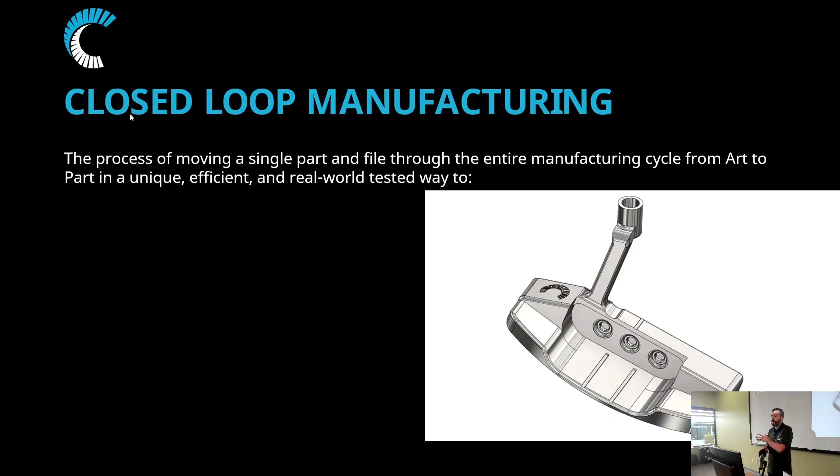If you guys were here last year, we introduced this new project, and it's actually on the table over here. We wanted to take a look at all the products we represent and take a single part file and move it through art to part, the whole design to manufacturing phase. So we picked a putter head.

We had an older putter. We reverse engineered it with VeriSurf. We scanned it in, then we actually 3D printed the head of the putter in stainless with desktop metal. And it's such a unique shape that instead of creating your own work holding on a CNC machine, we decided to print it in, I believe it was carbon PEEK. And that frees up a CNC machine. That material has just about the same tensile strength as aluminum. It's holding the part well. It's not marring it. It allowed us to do all our operations and finish that part.

They were minimal, with some engraving. We milled the face of the putter and we cleaned up the bottom. But it just shows you an idea of how 3D printing and additive can help your shops.

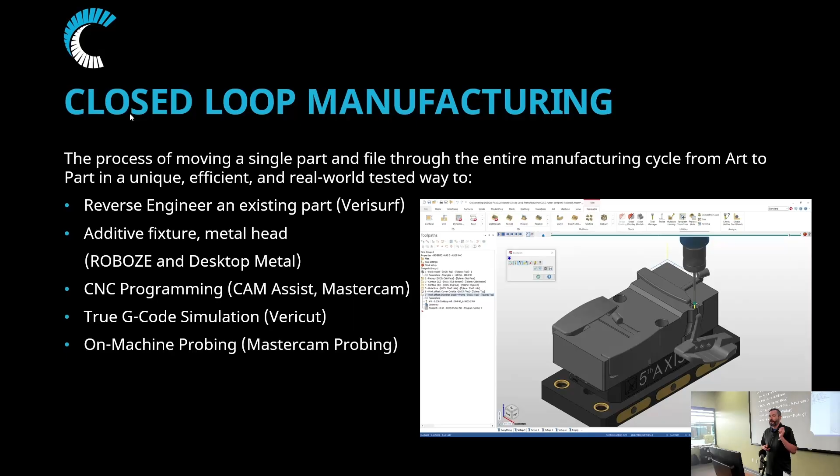So for the programming, we can rough the part out with CAM Assist, finish the programming with Mastercam. Then we want to make sure it runs correctly on the machine with simulation, that's where Vericut comes in. Before, during, and after the machining, we have probing routines to make sure that the part's located. We're inspecting it during and after. And then, of course, we're going to scan it in with VeriSurf and make sure that it's exactly what we wanted.

So the final thing, which is my favorite, is you got to take it out on the golf course, see how it does. Did not make me a better golfer. Not much does, I'm terrible. So we used it, it worked out. I loved it. I still stink at golf.

So we make all these, or we sell all these products. We service them, we offer support for them. So just keep an eye out for that.

There's also an article that we created. It's a 4-part series. It goes through the entire process of making this part. It's on machinedesign.com. So you go to that website, you click search on the top right in orange, then in yellow just type putter, and then you'll see on the bottom there's 4 different articles that you can read through. It's a good read.

Moving on to WESTEC that's coming up. They moved this from Long Beach to Anaheim this year, and they moved it a month earlier. So it's October 7, 8, 9. This is my pitch to everyone to go to the show. We have a big booth right up front, number 1201.

We actually have a really cool project that we're working on with 5th Axis, Gosiger, Kennametal, and of course Mastercam. This part's actually been cut and is sitting on a machine. I think they're doing some cutting today on it, I just heard that this morning. But it's an Okuma M560V 5-axis machine. So during the breaks, at lunch, go and check that thing out. It's a cool part, it's kind of like an aerospace amalgamation. It's got a bunch of different aerospace features on the part.

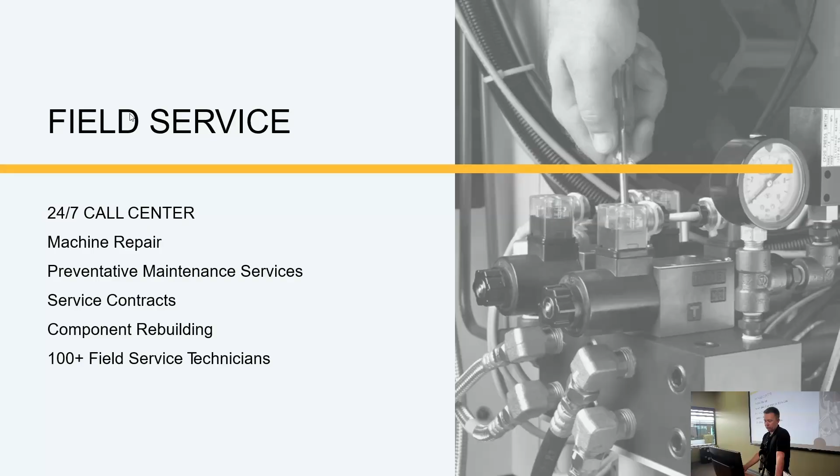We do process engineering, turnkeys, contract engineering, so if you guys need help programming or with your process development, we do that as well. Very strong service group that's available, 24/7 call center for technical support. We also offer equipment financing.

So again, 100-year-old company, we've got a large operating footprint, we've been around for a long time, we'll be here for a long time. We've got strong relationships with the brands we represent in all facets of the support of the equipment. You're welcome to follow us on social media, and thanks for being here. Thanks, guys.

You didn't tell me there was going to be an extra remote. What the hell is this? Throw you off. Yeah, perfect, great. At least I have an excuse now.

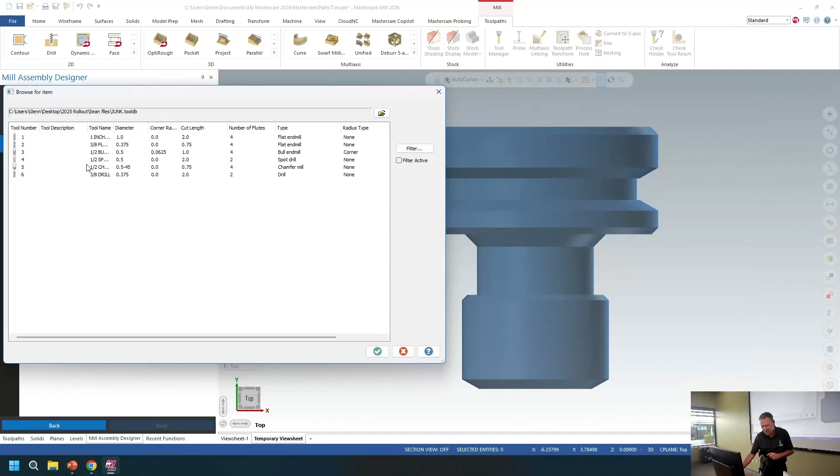Now, when you add a tool, I'll just grab one of mine. Okay, whoops, wrong size tool. Don't do that. Good news is I can delete and add a new one. Let's see. Close enough.

Okay, the good news is that within this assembly, I still have full control over tool edits, holder edits. A lot of people think that once I have this assembly built, it's done, and I have to do a new one if I want to make edits, and that is absolutely not the case. In this tool assembly tree, I can right-click and I can edit just the tool individually.

So what they've changed and made better, kind of like the machine group properties, is you can work with the different tree style buttons here: tool number, what type of tool, of course all your logistic stuff, cutting diameter, flute length, tip treatment, which again is basically what type of tool it is, and of course your speeds and feeds, all the other savable items, coolant, etc. You can use your next button to toggle through these items, hit OK, hit OK.

I have this all set and ready to go. Once you have taken those, and just to speed the process up, I'll add a couple that I have previously messed with here. Then if you'd like to save these items to a library, it's no different than it's always been. I can right-click and just save them to library and you're done.

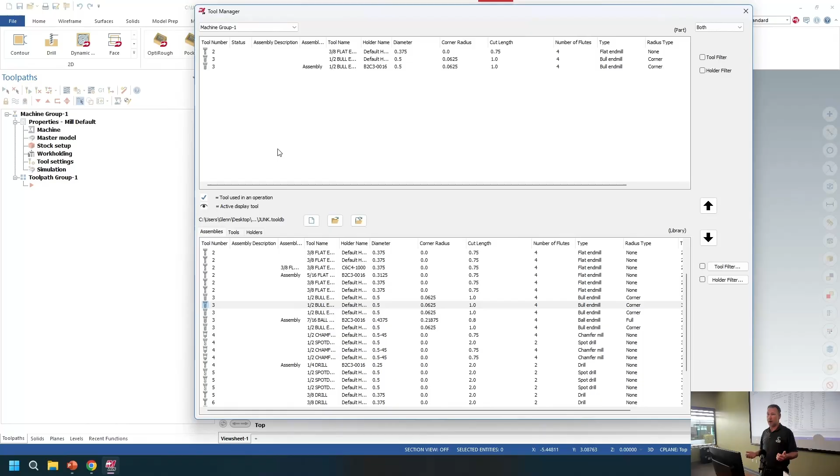Okay, so I really like this because, again, with less mouse clicks, number one, in the classroom I have to teach you less things. We get through the day faster. But I also have the root menus that I've always had. If you're used to using the tool managers, great, because this is still the same old manager it's always been, but with user-friendly items inside of it to help work things along and get your assemblies saved.

And don't forget, guys, if you have assemblies and tool libraries from older versions, they're very easily updatable. That's one of the things that I think a lot of people don't realize, that a few mouse clicks and your assemblies are moved into the new software, so you don't have to start over. If you ever have questions on how to do that, you can reach out to myself or one of the other tech support staff. We can get that done for you.

Lastly, and this is a quick one, but you may have noticed in Mastercam 2026 this little guy right here. I cannot tell you, one of those things when we at CAD-CAM first got the preview versions of Mastercam, we looked at that and went, okay, it's the same thing, just not down here anymore. Use the hell out of this, gang. This is one of those things where basically anything having to do with planes, 2D, 3D, is right here in front of you. And I got to tell you, especially as I'm getting older, now I'm using reader glasses, which I hate to admit, having something right in my face is a nice thing to have.

Okay, so you can access your planes right through here. You can change your graphics view, your coordinate system, construction tool planes. You can even switch between 2D and 3D. And the other thing that's cool is you can even create a plane from right here too. You don't even have to dive into the manager to do any of that. So that's one of those things, again, just a small, minute change, but it's less mouse clicks and it's right in your face.

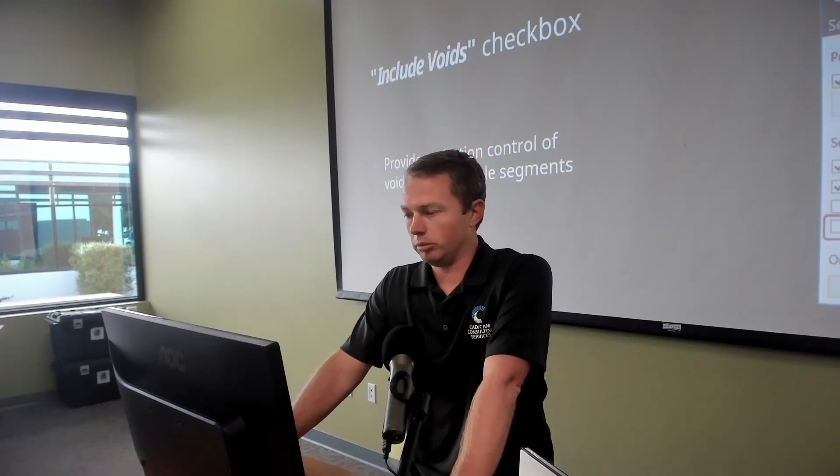So I'm going to show that here, and then I'll also in the same file show this priority safety motion, which is cool. Let me go over to Mastercam here and see if I can find my files.

Let's see here. I need Sean's reading glasses. I guess we're all getting old, huh? This one.

In Mastercam 2025 and previous versions, whenever you had a hole like this on the same plane, you would get one toolpath and you wouldn't have the ability to chamfer both sides. So I'll show that here a little bit, and let me move the prompt out of the way.

So this is your geometry selection, or solid hole selection, in Mastercam—everybody should be familiar with that. In the advanced tab now, under the 5-axis drilling, you have this include void option, which is checked. This is basically how Mastercam used to be.

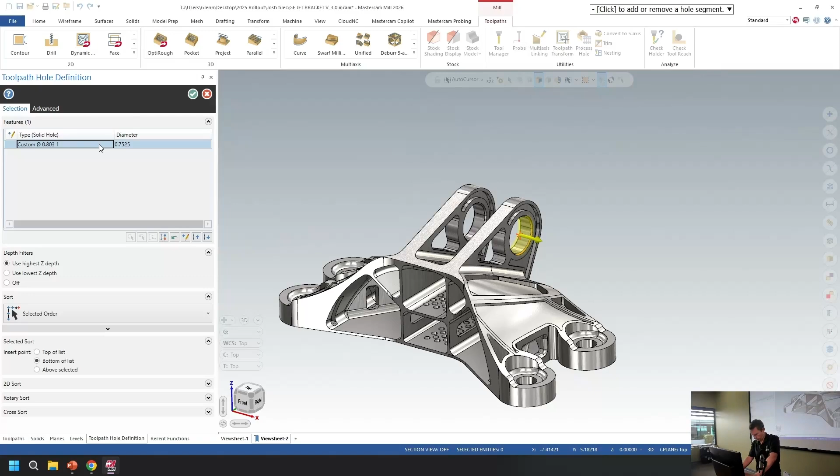So I'm going to show you—let me delete this and go in and select here. You can see it's automatically grabbing this other hole and reading it. So if I click over here, I cannot get a separate arrow on the solid hole. I'm limited; I would have to create another toolpath to spot drill or chamfer that, etc.

Now in Mastercam 2026, this is off by default, the include voids. So when I come over to selection, now when I click on the solid hole, I can also select the other one over here, make sure my arrows are going in the correct direction, green check, and I'm going to jump into the parameters here.

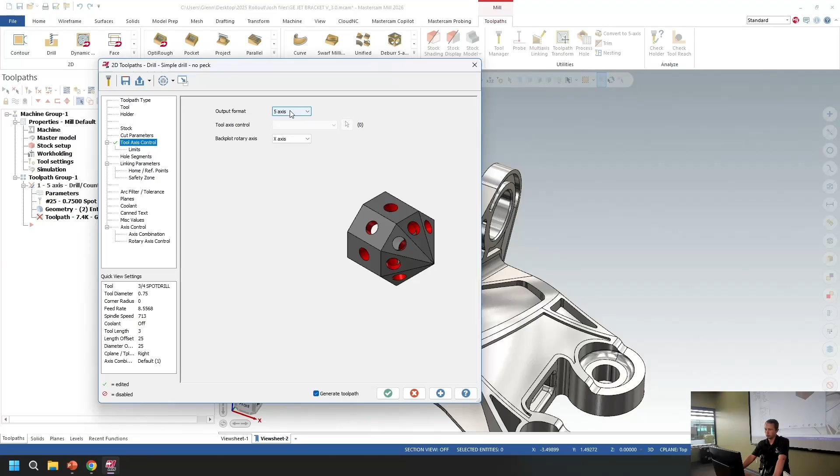You need to be on 5-axis output for your tool axis control, and set the other parameters—safety zone, all that good stuff. We'll take a look here for time's sake. I'm going to green check, and you can see now we can do it in one toolpath, whereas before this would have had to be two separate toolpaths. Just a nice little enhancement there in Mastercam.

Hopefully it makes your life easier—that's the goal. One little step at a time over a lot of toolpaths, a lot of years, but big improvements. So that's one really cool thing, and again, that's off by default. It's in the geometry selection under the advanced tab.

If you're used to the way 25 worked and you need that hole to go all the way through, you can go back to that. But now you have this option, which I think is really cool and helpful for operations like this. I'm also going to show in the same file here, under safety zone...

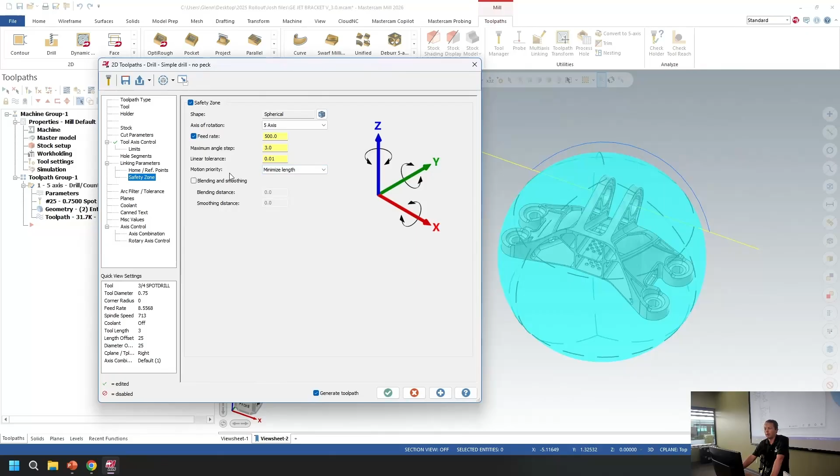So we're still in 5-axis mode for output. Under our safety zone here, they added a priority motion option for your retract length—you have 3 new options now. You have minimized length, which is the shortest distance, and minimized angle, which tries to get the least amount of motion on the rotary axes, so you can minimize that.

So I'm going to show this here—if I do minimize length, you'll see that I'm going to get motion like this. So I'm going to green check here, and I have basically the shortest distance, if you would.

If I go in and select minimize angle, it gives me the shortest, least amount of rotary motion needed. It's trying to limit that and be more direct. You also have balanced, which tries to do a combination of both. So you can select one or the other, and balanced tries to balance both as best it can.

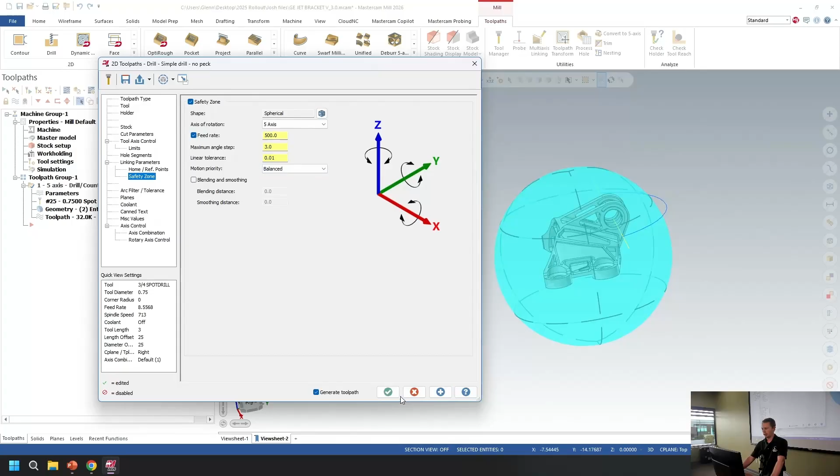In this case, we could try it, but I think it's not going to do much besides favor one of them. Yeah, so it's just picking the minimum angle, I believe.

Minimize angle, yeah. So if you have a motion you're trying to go around on your clearance there for multi-axis, like drilling or other operations, it can be helpful if you don't want your rotaries spinning around a lot. You have the option to minimize angle or minimize distance. Think of it like an aircraft flying around—if you fly to Asia, you fly over Alaska for the shortest distance. It's that same concept.

So I know this part shows it nicely with the sphere. It's not overly complex, so you can see, like I mentioned, think of it like a plane flight—flying across the globe, shortest distance, minimize angle, minimize length. So those are some neat new enhancements.

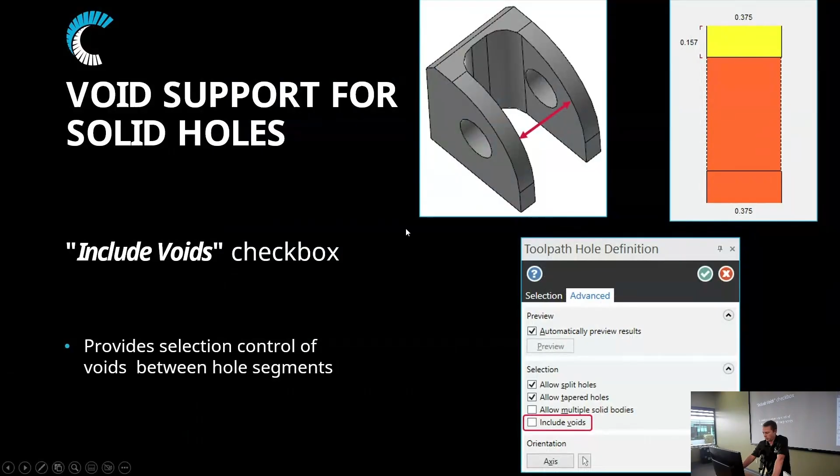I'm going to jump back into the PowerPoint here, and they also included a new thing: critical depths in OptiRough. So let me jump into Mastercam to show this.

Let me pull up a file here. See how fast this computer is, huh? Yeah, we're going to metric units. Cool.

So in OptiRough here, under our cut parameters, we have a new critical depths option in Mastercam 2026. Keep in mind, this is for step downs. We still have the ability to do step ups—nothing has changed, we've just added functionality, which is cool.

So in a case like this, you have a feature with flats here, and you could use step ups—that'd be one way of doing it. But if you're stepping down like this, maybe you want it to grab some of these floors and get some critical depths. So you can do it two ways now.

The critical depths option lets you include flats, so it'll automatically detect them and pick them up, which is really cool. Or you can select them manually—if you really want to force a depth cut to a level, now you can force it to that depth and it'll go around and machine everything at that depth. Maybe you only need it for certain applications, but it's more power, more functionality, and makes you a better programmer when you need it.

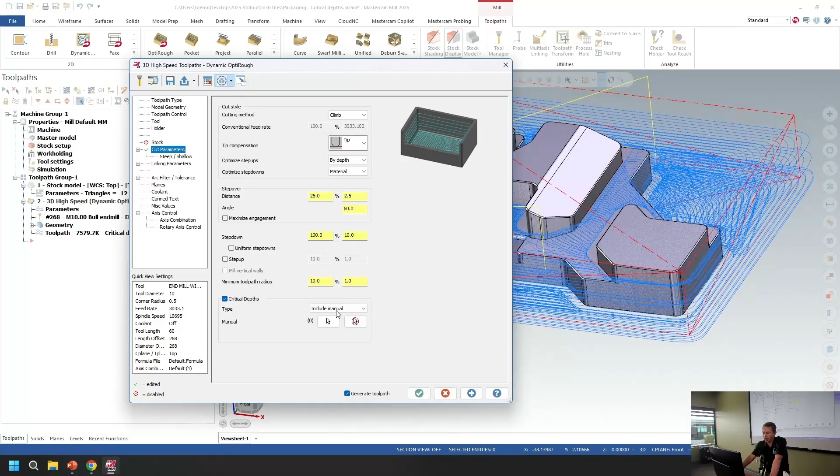So if I hit include flats right here, I'm going to show you what it does. You could see when I tipped it to the front view, it wasn't getting the bottom floors. We'll regenerate this here.

This could be helpful too if you're cutting, say, 100% or 150% of your tool diameter, and you're really close to that floor—maybe you want to grab that critical depth, or maybe it's a bit above. It's really helpful to grab it with critical depths. You can see now I'm getting the flats. It did add a tool path, but I am getting those critical depths that I want—just a nice enhancement that'll hopefully make your life easier.

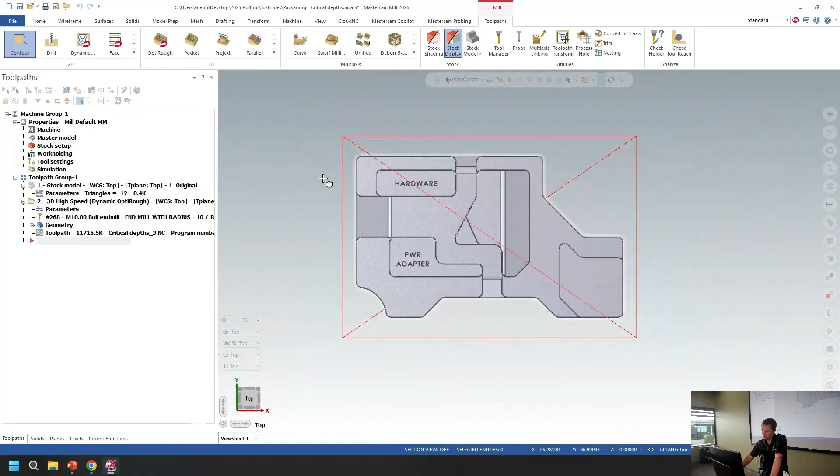And the last thing I'm going to show here is in Contour. Let me go to—I'm in the wrong plane, hang on one second. Let me flip this to top here. Isometric. So I go back to contour here.

I'm going to grab just a feature here to show this. You're probably familiar with it from other toolpaths - you have the dynamic motion with the color selection for chaining geometry, right? So they just added this in the contour toolpath, and I believe a few others as well. It was in the dynamic toolpaths, like Peel Mill and those. So they just added it in contour. It's a nice little addition - it's helpful because now you can see, okay, I chain my geometry, it's green.

You can change these colors if you don't like the color and it's hard for you to see. But it's just easier to see now - green chain, avoidance model, etc. In contour, it's pretty straightforward because we're not usually doing a lot of avoidance stuff and different things. But in dynamic, I'm sure you've all used it and it's been pretty helpful. So just a nice little additional enhancement there.

All right, and I believe - oops, got the wrong thing. Did I go back to PowerPoint? There we go. Thank you. Any questions? All right, either I did a good job or I didn't, so thank you.

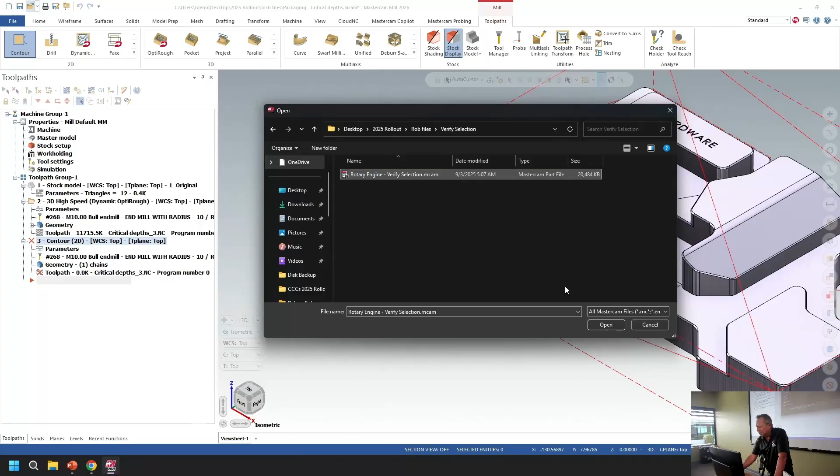This one is just a nice, clean enhancement that helps you guys with some really busy models. As you know, trying to select something that is deep down and buried inside of a model, you start hoping you can click on it. You're clicking your mouse all over, and you don't even know what level things are on. So let me show you this nice clean one.

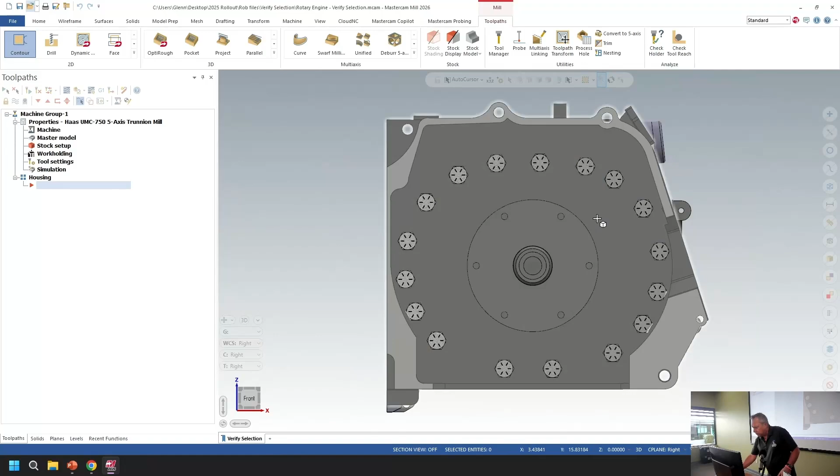Notice when I hover my mouse over the part, now what happens is it'll give me a number - it's like there's one of 7 features. So what I can do now is not move my mouse, let that hit, and when I right click, I can see, if I'm going to grab this surface here, hide it, and grab that surface. So just another thing that's going to make your life a little easier. And depending on the view you're in, it'll find that number. Again, it's just a right click and bring up what level it's on, and you can easily select that and move on your way.

So let's go back. Let's go back into the PowerPoint.

Yeah, so the tapered helix. You might look at something like this and say, well that's cool, but it's kind of just a switch, right? Why do we have this switch? Well, let's go back to when we started with dynamic milling. It was all thought about based on the tool, giving you guys control of the cutting tool with the step overs and the whole motion. And I'm assuming all of you are now using dynamic - let's hope. So with that in mind, we decided we need to control the tool actually getting into the material now, and how are those chips going to come out. Something as simple as just throwing a switch with tapered helix is going to be a huge advancement for you guys.

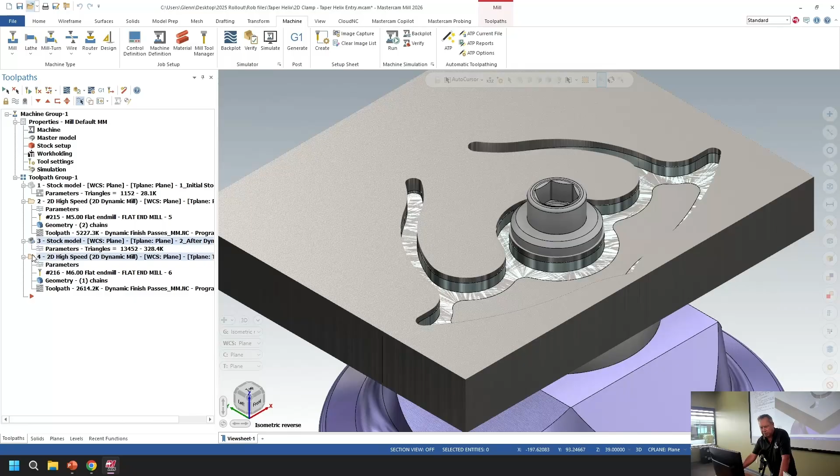Let me see, tapered helix. Let's just kind of grab a part, switching back. Okay, so let's take a look at this entry, and we'll run it in Verify. So this is the standard, typical - let's do some clipping. Oops.

No, hold on. I got my clipping off. There we go. So let's just kind of clip this and step it through. So this is what you guys are used to using.

Obviously, the tool will come in as a helix motion. And if we bring this in here, you can see once that tool gets down to full depth, then it's going to start cutting. And as we're doing this, we're just pushing these chips around inside that hole.

There's nothing to get those chips out of the hole, unless you're on a horizontal, right? So just a nice little switch here, come into the tool path, and in the entry, just turn on tapered helix, and that's all I have to do, okay?

So what it will do is take that motion, you can kind of see it right there, and what it'll do is it takes 95% of the tool diameter for the top part of the helix down to 25% of the tool diameter down to the bottom part of the helix, okay? Now keep that in mind too, we're going to tighten up that helix going down.

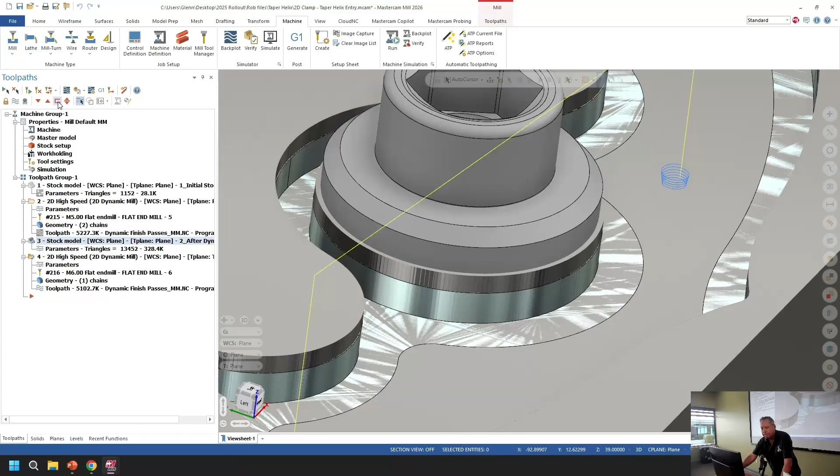So you might need to slow your feed rates just in case, right? Because it's going to start moving that machine. But let's take a look at the verification on this. And you can see just this quick little enhancement. Again, you don't have to do anything but turn it on.

Let's get it down in there. And let's pause that and grab this. All right. So you can see now as it tapers down and as the tool starts to actually start cutting that material. And here we go.

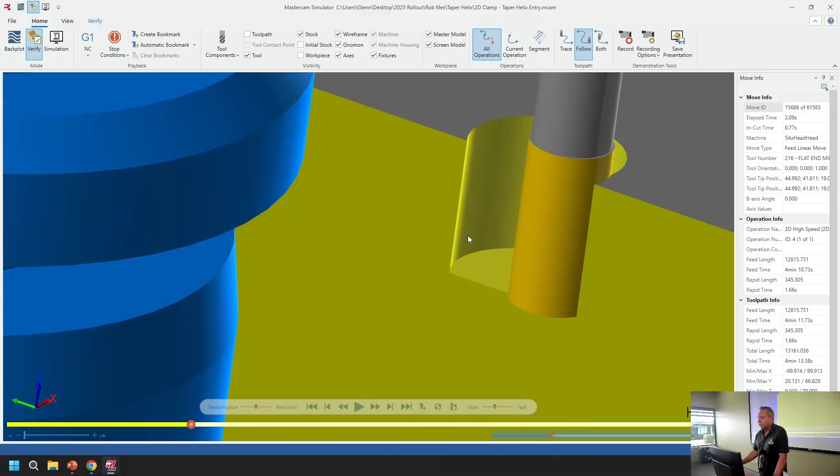Each depth cut, as it starts going, you can see it cuts here, gives a chance for the chips to get out. Make another cut, more release of the chips. And again, respecting the tool, just considering the life of the tool is really what this is doing.

And again, just something simple. This is why we have these enhancements, because you guys have been requesting them.

3D deburr. How many are you deburring your parts using Mastercam? Okay, just a handful. Take a look at the 3D deburr.

Every part has to be deburred, and it's probably one of the most unsafe processes that you have to do for the finished part. You're literally scraping material away, and you know the problems.

So we introduced in 25, we introduced 3D deburr, and we also introduced the ability to use tapered tools. But when that came out, when we were cutting with a taper tool and came to an edge, it would cut and then pull out, come back in and cut, pull out. So now we can allow for that tool to stay down.

I don't think I need that. I'm going back. There we go. So we can allow for that tool to stay down.

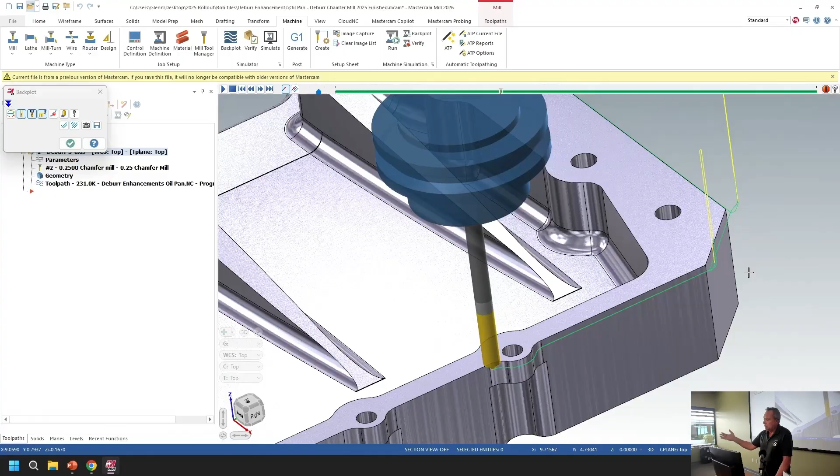You can see as this transitions from this sharp corner to this sharp corner, it's pulling up and coming back in. Now at the end of the day, all of that's going to deburr, so it's not missing anything. It's just that irritating retract move.

And in 26, all you got to do is regenerate. So in 26, when you're actually doing the tool path, it'll just be natural. But if you're bringing in a file or a legacy file, then all I have to do now, as you just saw, is just regenerate the tool path, and the tool stays down. It acknowledges those corners, okay? So it's an enhancement you don't have to do anything with, right? Just do it.

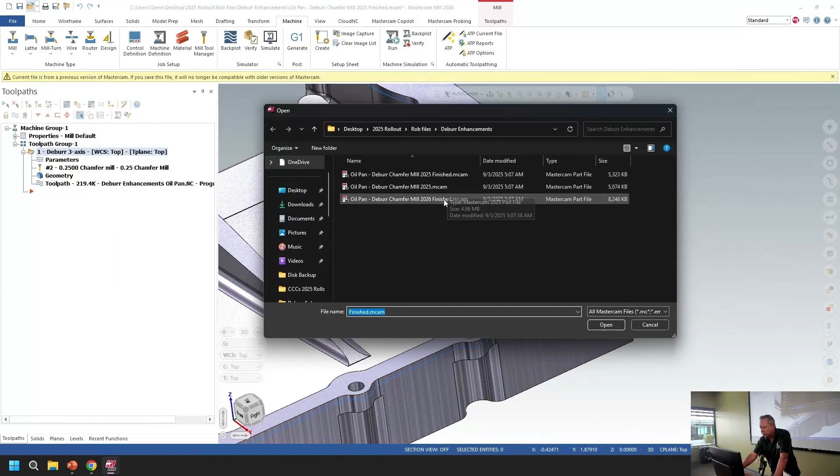One other feature that we added with deburring was with undercuts, with lollipop cutters. In some cases, it didn't cut all of the holes in the undercuts with the lollipops.

It got a little busy when things were... let's see here. When the undercuts got past like 45 degrees, it just kind of kept pulling up inside this hole, and it just didn't lay down, right? And again, you had to do a lot of trickery to get that to work, and there were a lot of things you could do to get around it, but we just put in this switch.

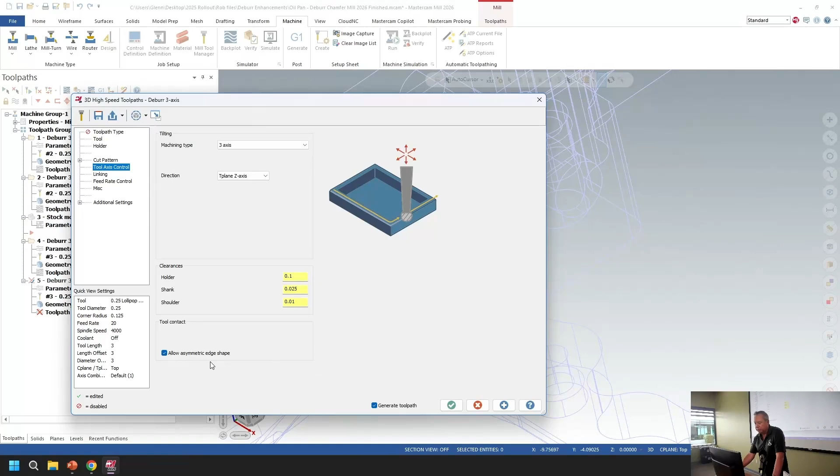To allow asymmetric edge shape. That's all it is, just a switch. Now it's off by default, okay? And the reason for that is you have legacy files. We want to read those legacy files in, and then you can come back in and throw the switch, regen, you're done. Save it as a 26 file. But just keep in mind, it's off by default.

All I do is turn it on, and then it respects... we'll have to regenerate here, okay. So it will again respect that whole undercut and cut those edges. Oh, I still have my clipping on, hold on. So we get this guy in here. Let's go in here, can kind of see through it. So you can see that this is kind of where the issue was, in that cross section right in there. And just by throwing that switch, it takes care of it. Again, keeps the tool down and gives you a nice cleaner path.

How are you driving that? Is it surface or edge?

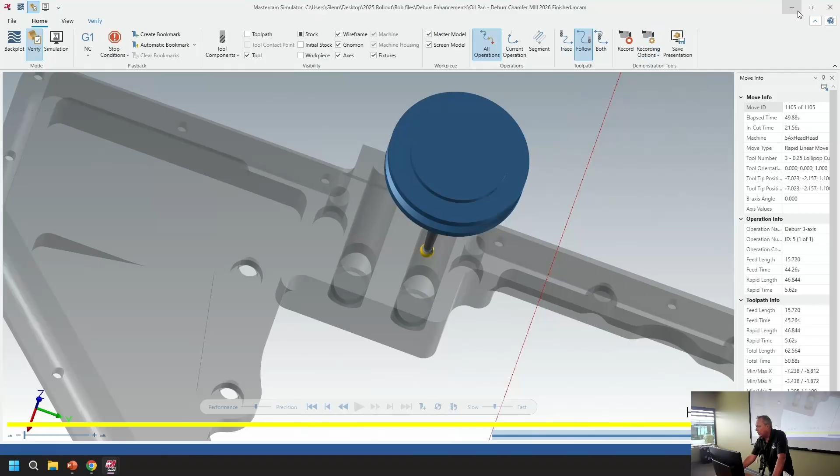You're grabbing the edges. So in the 3D deburr, just grab the whole part. Your machine geometry is the whole part, because you want a gouge check against that. Then you have the option, if I grab the whole part, I could do the auto detect and it would look for every sharp edge. May not want to do that, not in this case. So with the user defined, I can come in here and just pick, and it's just picking those edges, as you can see right there. Right? And that's all I do. Just pick the edges that I want to work with and throw on the asymmetric.

And again, you may want to turn it off in some scenarios too, right? So again, off by default. Very simple toolpath to use, very safe toolpath. Complete gouge checking. And I strongly encourage it, because again, you've got to deburr your parts.

All right, so last on the list here. Like I said, we added to the mill turn product the wireframe toolpaths. Does anybody even know what the wireframe toolpaths are? Jay, I already know you know. Okay, and Derek back there. It's funny, this was before we could cut any kind of surface in Mastercam. So I'm just talking about 2026, I'm taking you to 1990 now. Okay, we're going back in time, because that's how we used to cut 3D shapes.

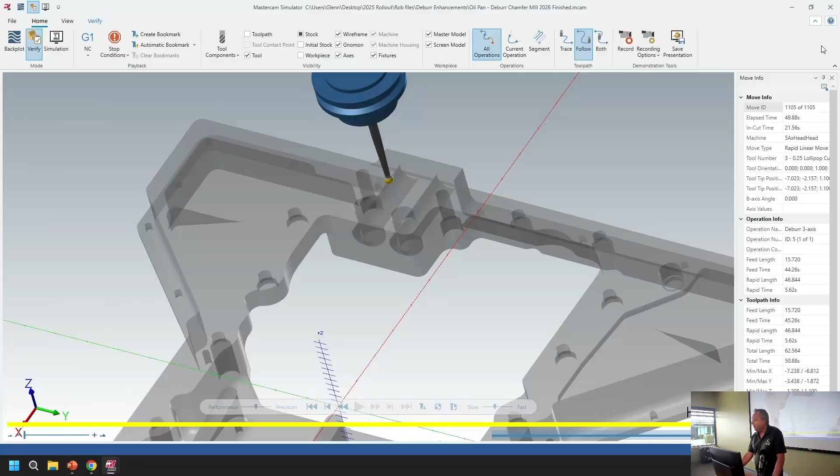And again, this is going to be in the mill turn product. So we'll open up mill turn. Then I know I have a few mill turn customers in here. So if you'd like to go back 35 years, almost 40 years in time, here we go.

So milling toolpath, here they are. You got your wireframe toolpaths now. Again, they picked the old guy, but they forgot that I got a bad memory, so let me see if I can remember my way through this. Swept 3D. Again, it's going to ask me how many contours I have. I have one. I'm going to take this guy, and I'm going to sweep it along that guy. And here's our tool, the old parameter page, again, kind of trying to trigger the memory here.

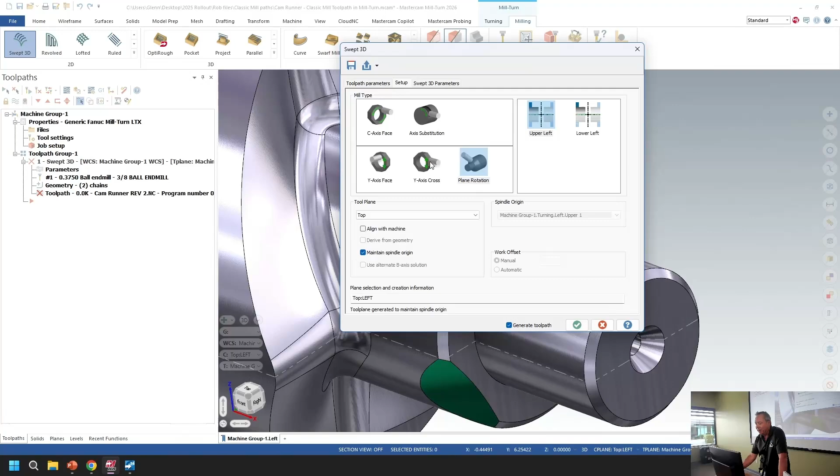The setup, any of you mill turn people, you're familiar with this. So you got to set up your setup here. But then you're probably not, obviously, familiar with this page. And this is where you literally tell it, this is my step over, this is my across. We'll make this pretty, I can zigzag one way or do circular, stock to leave. I'm thinking 2 inches. I'm not going to cutter comp this. And I think we got it, let's see if we got it.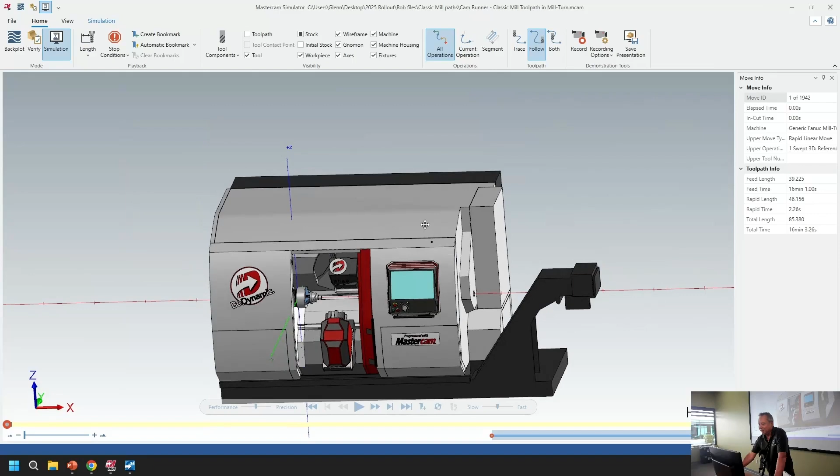So we're going to take this tool, and we're literally gonna just follow that contour across. And let's see how it works here. I'm gonna take it into the mill turn simulation, and this ended up... actually, I was laughing about it, but this ended up to be one of my favorite enhancements. It's just simple code. Okay.

Alrighty, let me get out of this. I think that's it for me.

You got one question on the stream. It's about deburring outer edge, someone was asking if you can still use chamfer operations for that, like the contour chamfer.

We didn't take anything away from you. Let me just open up that file again. The deburr toolpath is just another toolpath in your arsenal to deburr a part.

If you're looking at, and I'm assuming they're mentioning contour, let's just grab something here, that outer edge. You still have that control, so we could still go in here and switch this to 2D chamfer. The downside is that you don't have the gouge checking that you would have with the solid modeling.

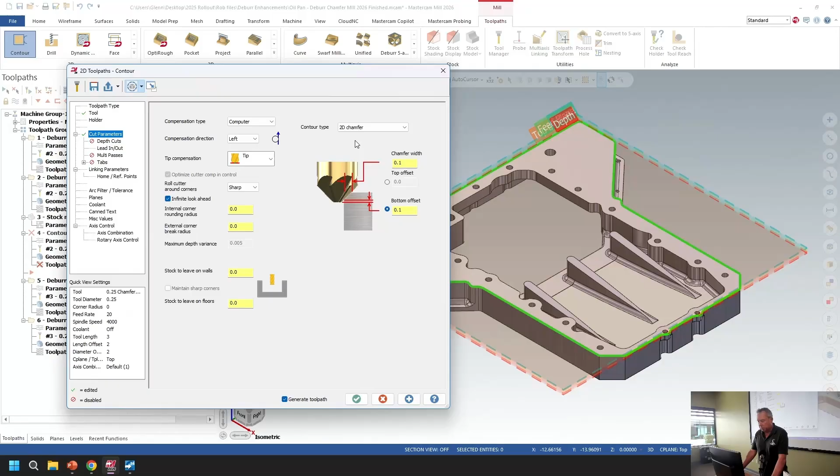and the 3D deburr toolpath. Now let's take this a little further. If you already have multi-axis, then you have the deburr toolpath in multi-axis. You don't have to purchase the 3D, you also get the 3D one. And the advantage to that is it's less code.

The multi-axis toolpath is going to be vector-based code. The 3D deburr toolpath will be less code, smoother arcs and lines and that kind of thing. Also it will work with mill level customers, you don't have to have mill 3D. And also let's not forget about our router people, they have it as well.

So that toolpath, the deburr toolpath, does live in here, and it's called deburr 3-axis. I hope that answered that question. I think we went the right direction with that. I'll wait, and I think you're good. Okay.

Yeah, any other questions online? Okay, well then, let me get out of here before I make a big fool of myself. Or bigger fool. Okay, awesome. Frank.

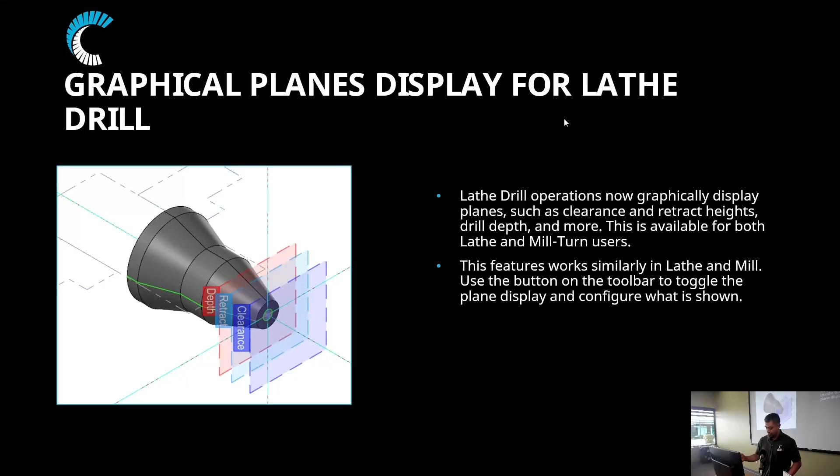There were a few things that are missing here, to the side. I don't know why they're down here, but I did want to show this.

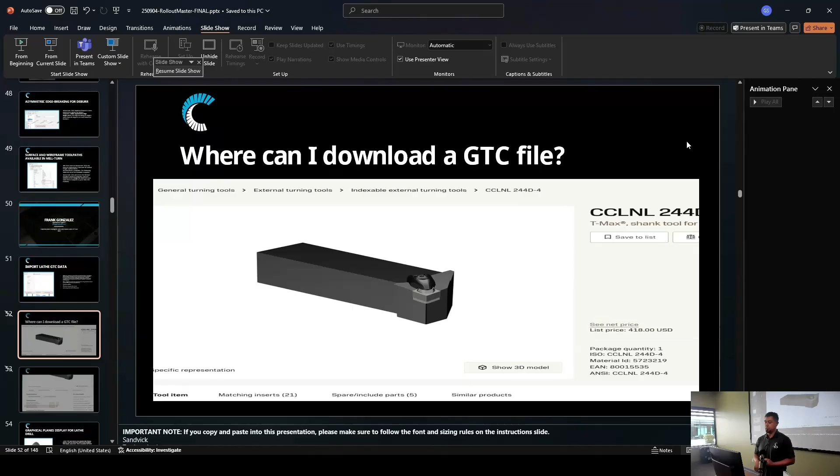So where can you download a GTC file? Like the file that I'm using, I downloaded it from Sandvik. I know there's a few other websites like Tools United, Kennametal. This is the specific tool I'll be showing.

But anyways, you can see here, when you scroll down, once you select your tool, you have the option to download a DXF or step file. Again, you'll see this option on the vendor's website for the GTC package. Okay.

Just out of this. And now to show you how that works, let me open up a file here.

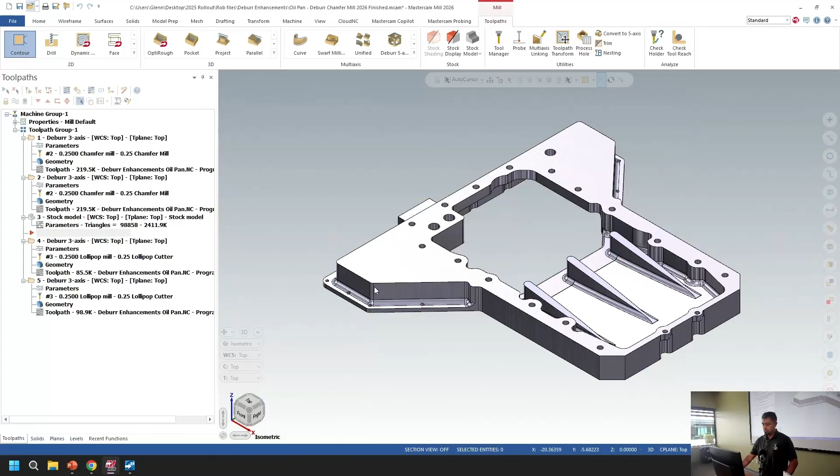Okay, so I'm in lathe. This would work when being in lathe or mill turn. So to import a tool, the way it works is you'll come into your lathe tool manager here.

You're gonna right-click in this white field up in the top, scroll down to the bottom where it says Import Export Tools, then Import Tool Data From, and now you'll see this option for the GTC, Generic Tool Catalog. So we're gonna click on this.

This will open up a window, which now I'm going to be opening and going into the files that I downloaded. So I downloaded a couple. One, let me see.

It's not opening, sorry about that.

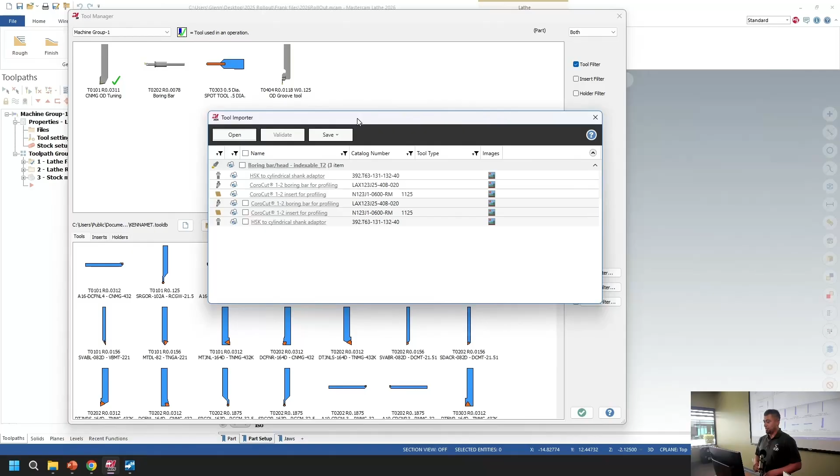So anyways, you can see here, there's a whole assembly. There's an insert, there's a holder and an adapter. You could select each one of these individually, or you could do the whole assembly. And if you hover over here on the right-hand side, you'll see it'll show you an image of the components.

So now to do the whole process, I was gonna use this tool. You go ahead and select it. The next thing would be you validate it. Validating is just Mastercam doing the work in the background of what you would normally do by selecting your holder, your insert, defining the quadrant where it's gonna be cutting, etc. And then you'll see a green check mark here, which means it's ready to go.

So once it's ready to go, you have the option here to save, and you could either save it to your existing part file, which is where we're at, or you could save it to a library. So I'm gonna select part file, and you'll see it updates up in the back.

I was playing around with this, and you'll notice that the image it's showing is because I have something in the background. If I was starting with a new file and there's nothing back there, all you would see is the actual tool itself. But now if I come in here and double click, you'll see the tool's properly defined, and you might have to go in there and change certain things, but all the tool data that came from the website is all integrated in here.

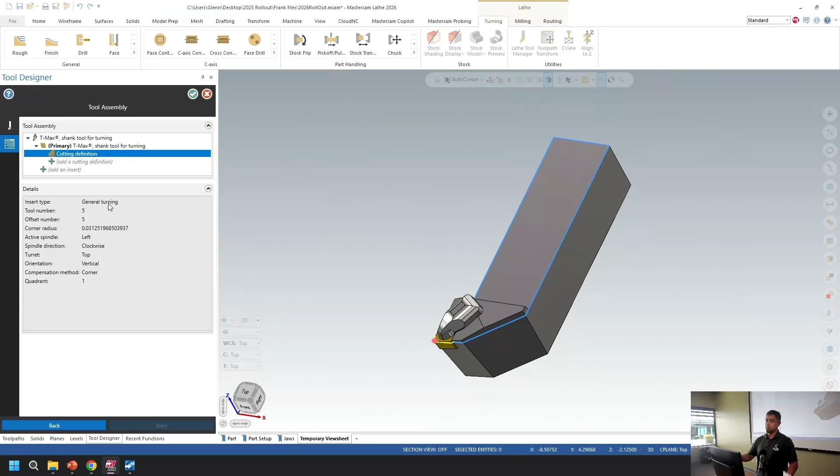So again, something takes the fun out of design, like picking your holder, inserting everything - it just does it in a few clicks. Any questions on that? So you have to have it zipped - yeah, it'll come zipped. So exactly how you extract it from the tool vendor's website, that's how you take it in.

Awesome, okay. So now the next thing will be the graphical planes, right? In lathe.

Let me activate this. So now in turning, when you're doing a drill operation, we'll select our tool, and once you're in the parameters, you'll see this plane display option. You could turn this on and off - if you don't like it for whatever reason, you don't have to be using it. You could turn it on, turn it off, and select what you want to see. So if I want to see my depth graphical plane here, I could just simply grab it and drag it to my final depth. I could activate my clearance, my retract, and just move those along wherever need be.

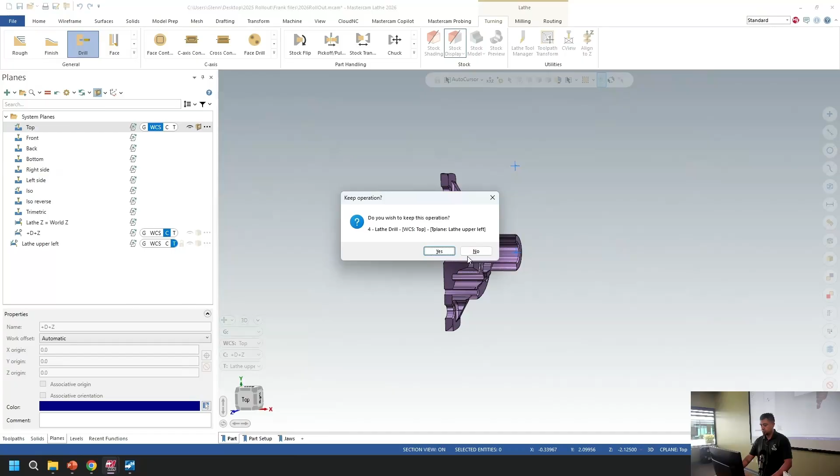And go back in here, you'll see that this also works by turning it back on. You could turn on and off the labels here, so if you type in a value, it's also associated to it. So again, something simple, but it makes a difference - at least for you to go in there and be able to say, I just want to go to this depth and not there. So anyways, in a nutshell, that's pretty much it - those are a couple of enhancements. I don't know if you guys have any questions.

Good, awesome. All right, thanks Frank. We're actually - thanks all for coming out.

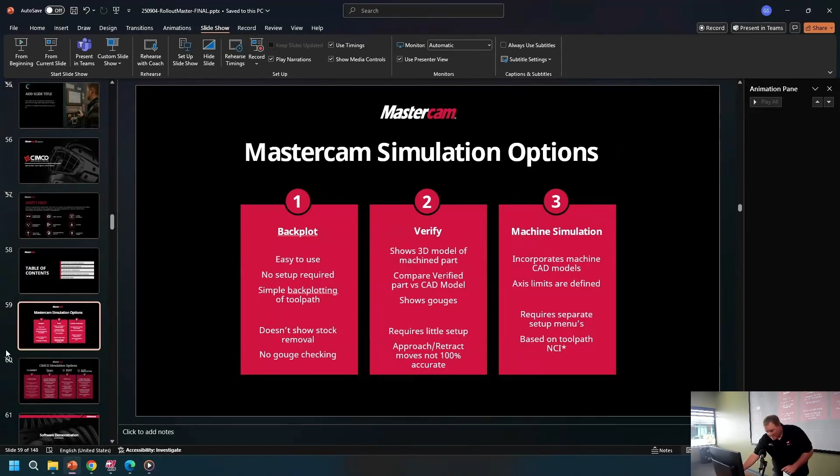Some of the - I'm missing a couple slides, but that's okay. Oh interesting, oh it's hidden. Let me unhide that slide.

So again, that's on the Mastercam side. On the CIMCO side, we also have something similar, called CIMCO Verify. CIMCO Verify is directly loaded up in Mastercam - I would say it's comparable or equivalent to the Mastercam Verify. The difference is that we are using the CIMCO technology, or the kernel from the simulation that we have in our CIMCO Edit, developed in-house from the ground up. The big thing there is we leverage the new technology of your graphics card, so GPU processing, and it's 10 times at least faster than going off of your CPU instead.

So to give you an idea, CIMCO Verify is equivalent to the Mastercam Verify, and they offer that with machine simulation. We can tie in the machine models and do accurate collision checking as part of that. Some other options get into true G-code simulation, like CIMCO Editor, which is more of a backplotter specifically for G-code simulation, along with machine simulation within CIMCO Editor, again tying in machine models, axis limit checking, and collision detection.

They offer a lot of different varieties as far as where specifically you'd want to use that simulation. A lot of people say, well, I'm running a 3-axis part. In my opinion, for the cost of it, if you break a couple tools, you've paid for the product right there.

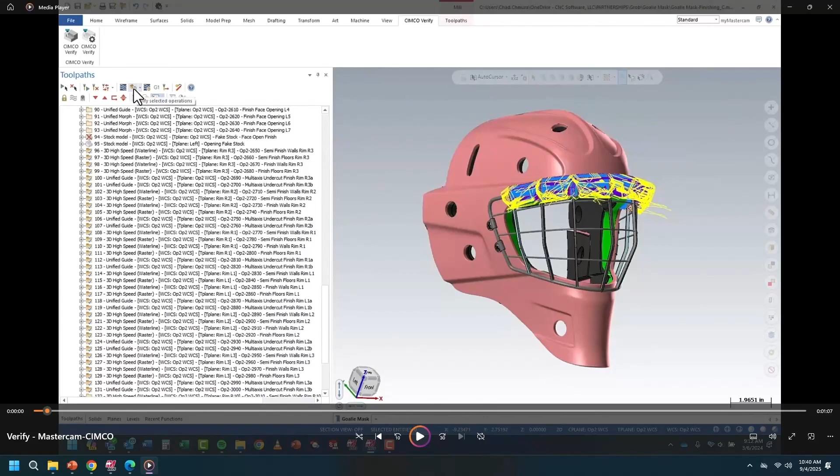To give you an idea as far as what we're talking about, specifically using the GPU for processing, you guys may recognize this part, the goalie mask. This is something one of the older applications engineers at Mastercam did probably a year or two back. In this video, we'll just start rolling it here, do a quick time difference. Notice we're only bringing in maybe 20 operations as part of it, doing some finishing here.

So obviously we're already at a minute, not even loaded up, right? Then we start playing and it's still loading up in the background as part of that. As you can see, in about 6 minutes and 48 seconds, we're finally finished with that grouping of toolpaths.

Now, I'll speak for myself, but I'm not a guy that can program and get it all right the first shot. I'm usually going in to verify 20, 30, 40 times in order to make revisions, tweak something here and tweak something there, and dial everything in. So, 6 minutes, 48 seconds.

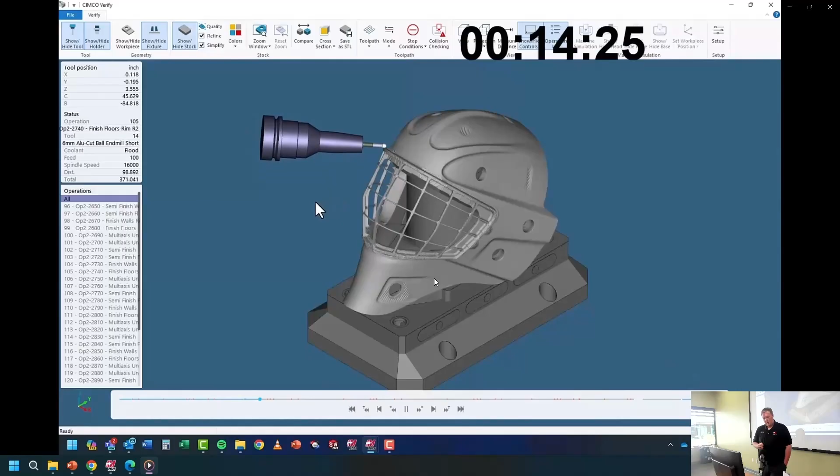If we look at that within the CIMCO Verify side, again leveraging your GPU and processing, we load everything up and go ahead and play that through. What you'll notice is that we're at about 21 seconds in order to do that. So drastic time savings is part of it.

Now, if you're going in 20, 30, 40 times, you're not spending all day in verification where you could actually be programming maybe another part, feeding the floor, whatever it may be. So again, talking about what tools can make you a more efficient programmer, this would be one of those that I would strongly suggest taking a look at as well.

Any particular questions on the simulation or the Verify that CIMCO has to offer? And even though I'm here with Mastercam, CAD-CAM Consulting is obviously a distributor of CIMCO products.

And that leads into my Mastercam probing presentation. As I used to work for CIMCO, Mastercam Probing was formerly known as CIMCO Probing, and Mastercam acquired that technology or business in March of this year. So part of that transition is I came over to Mastercam, but I'm still involved with the CIMCO products overall.

So quickly, we'll just go through some of the changes from CIMCO Probing to Mastercam Probing. We'll go over what is probing, why to use it, when can you probe, and then perhaps even go through a little live demonstration as far as what that looks like.

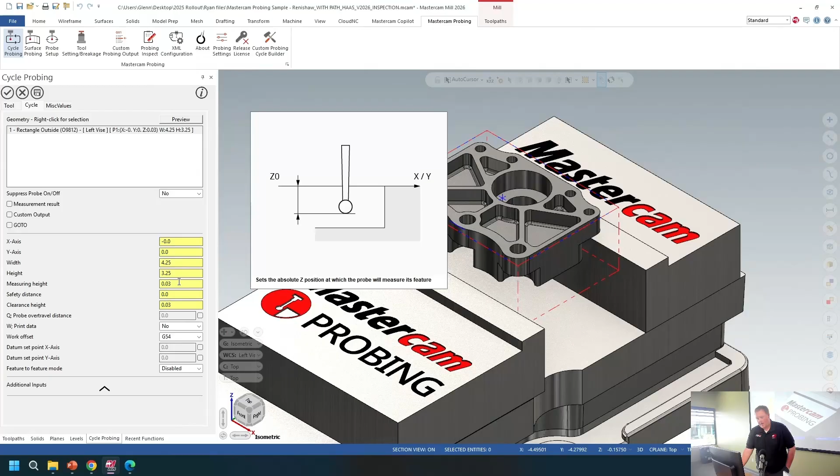Now it's just up to me to say, okay, this is how deep we want to go, maybe this is how much we want to stand off the surface, and maybe this is my clearance height. Again, because we're within Mastercam, and for those that recognize these being yellow fields, you can right-click in as part of there, and grab geometry or information off of the graphics window itself, getting a live updated feedback as part of it.

But in this case, since we are setting a work offset, I can maybe give it a little over-travel distance, tell it my work offset we need to set, and then we're good to go. From that point, it's now a valid operation. We could run it through graphics if needed. And then ultimately, if we post out, you'll see that we have the easily recognizable Inspection Plus code.

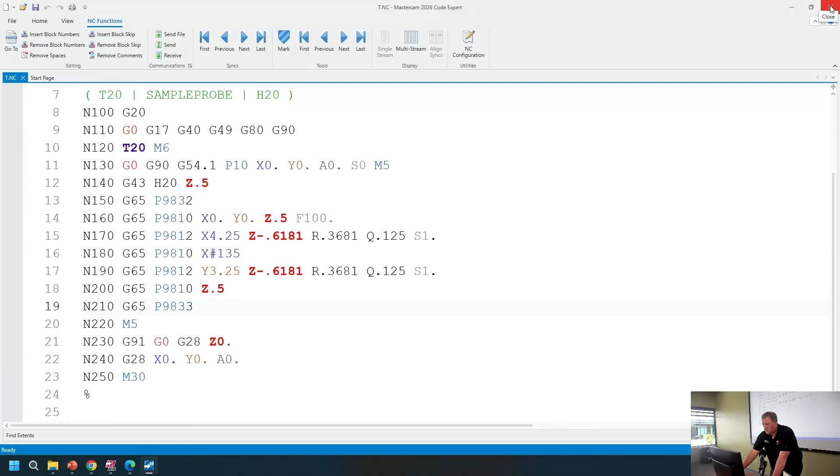That you're most likely used to seeing, right? So probe-on commands are 9832, this is posting out for a FANUC. 9832 probe on, protected safety moves are 9810, 9812 is our width cycle in X, width cycle in Y, up out of the way, turn the probe off at that point. Okay, so again, just a simple kind of operation, but everything follows that same workflow.

For instance, maybe there was this center bore, maybe it's a critical feature, tight tolerance, right? I'd be able to do the same thing in process where we can actually go in, set it up like a normal operation using the inspection cycle, measuring that particular bore. In this one, I am writing the diameter, the actual diameter, into a pound variable, so that way I can look at the macro variables page.

Some controls will display it somewhere on the main page, so there's different options you could certainly do. But in this one in particular, I'm also leveraging our if-then conditions. Mastercam Probing considers that feature to be in one of these three conditions.

It could either be scrap, which in this case being a bore would mean there's too much material removed and there's no salvaging it—it needs to be remachined—or it's too small, or it's within tolerance. So we can tell it if it's scrap, maybe I want to do a manual entry. Maybe I don't want to continue making a bad part, but maybe I want to do an M0 to stop it, or go to the end of file.

Like I said, I personally like to do a manual entry. If I'm on a FANUC style control, I'll do something like pound 3000 equals 1, give it a custom alarm message, so the operator knows why the machine's stopping. If it needs to be remachined, if I needed to babysit it, maybe I do a similar approach and stop the machine, and you guys can determine what to do with it from that point.

Otherwise, maybe you want to go back to the operation we finished and recut that. That's where we could say go to an operation—we'd be able to select that operation out of the list. I can see it was a contour, finish center bore is my operation comment, and now we're going to recut and rerun that particular part. If we're within tolerance, then we'll continue on like normal.

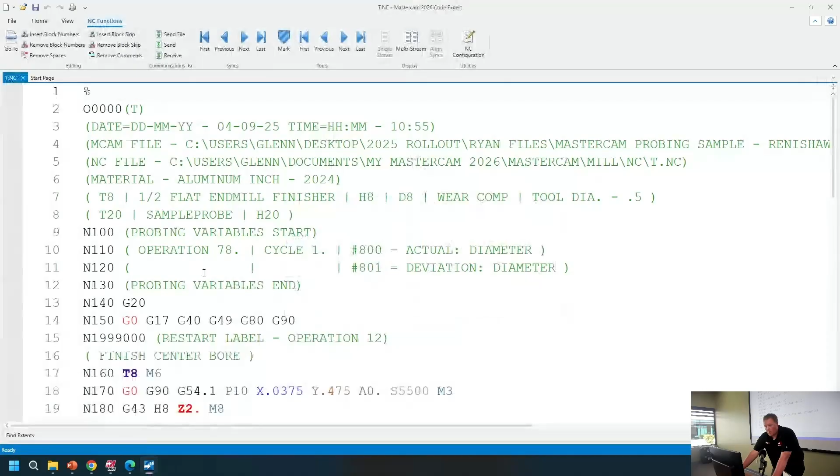The nice thing is, if we take those and post it out, we handle all the formatting for you. So if we actually look at the code this time—there it goes. You'll notice that we're automatically putting a restart label, a sequence number, so that we have a point to restart to. Obviously the first time we're just reading top down, so we just cut the feature.

We're coming in doing the actual probing itself. You'll notice there are a couple extra inputs here to the macro—here's where I'm actually copying in that data. So Renishaw is writing into these common variables, and those are being overwritten per probing cycle. By copying that into a user-defined variable, it's going to stay there so you can reference that data later, use it in the calculation, whatever you may need to do.

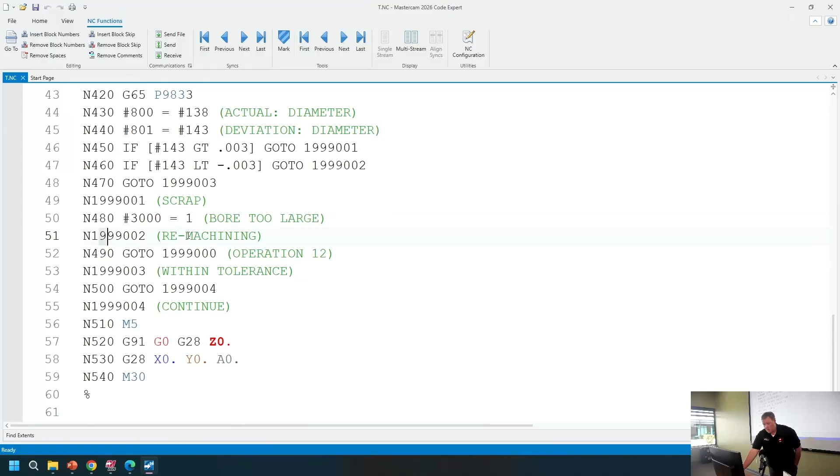But then you'll notice we have these if-then conditions. We're referencing the pound 143 variable, which on a FANUC is the deviation based on the diameter of that bore. So we're saying if that deviation is greater than or less than the tolerance I gave it, now we're sending it to a different label—we're actually scrapping it out. Maybe we need to remachine, rerun, and cut it again. Otherwise, we're within tolerance and continuing on like normal.

So again, that's all going to be output for you with minimal setup within the GUI.

The last thing to highlight on probing is using it post-machining. Again, we can use it to check features, all within the machine without removing it from the fixturing or whatever the work holding may be. We can obviously output that data into different reports.

One thing that could also be done is using our probing inspect. Probing inspect will take the results from the machine using a DPRNT statement, and that allows us to import it back into the Mastercam file and save it natively. That way, if we wanted to see where things are at, we can overlay to a view like this and see that data. We can see that this particular concave feature was actually overcut. My tolerance was 3 thou, so that measured at 3 thou 2/10, right, as part of it.

The other ones are within tolerance, and that's why I'm seeing the color difference there. In addition, we could create a probing report, and that way have some type of information to go along with it. So again, you can certainly reference the probing and incorporate it into your program in a number of different ways and areas to better the workflow.

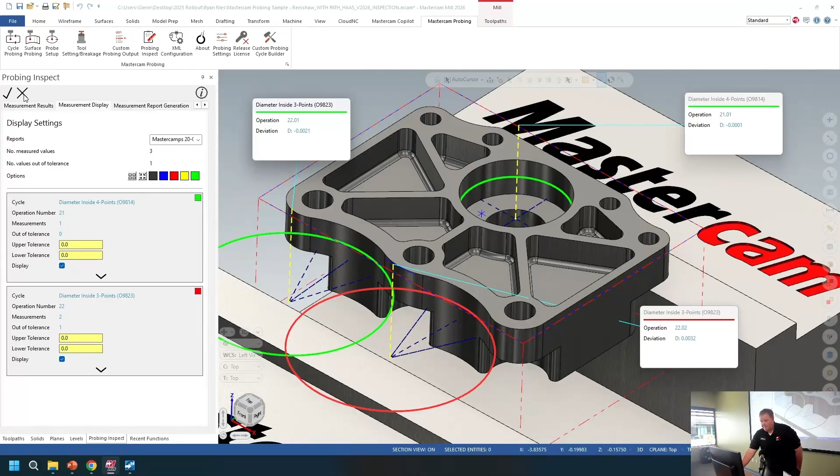So this is an add-on? It is an add-on, yep. If we already purchased the Mastercam Probing, will it be an automatic add-on? Correct. So license for 2026, or? 2025 update 7 or 2026. So the data would basically have been merged in already to your HASP, NetHASP, or networkable web-based license, and then you would most likely just need to update your license. Sometimes that's like a deactivate, reactivate, more or less. You could also go through the help menus in other instances.

I forget exactly where it is, but you can go ahead and check for license updates, check for updates, show new licensing updates. You could do it that way as well if it's hosted locally.

So if anyone's running a HASP, those are the purple dongles. That one does require what's called an ACC file, and that's something that CAD-CAM would be able to provide if you guys need it. But then at that point, with 2025 update 7 or Mastercam 2026, we'll be able to read that information correctly.

I got a question here: how to set a probing cycle in B90? I'm assuming they're referring to a rotation in the part itself.

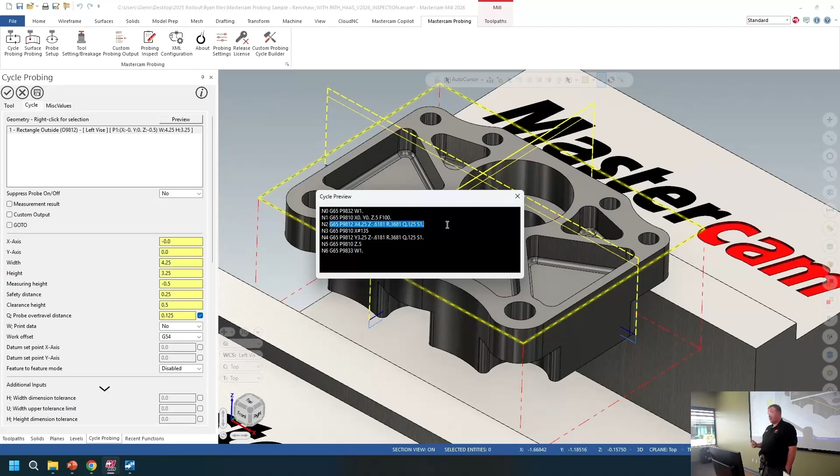But being that we are referencing, in this case, the standard Renishaw macros, one of the biggest things I leverage in my trainings is the Renishaw Inspection Plus manual, just because that's where you can actually see where the variables are being written into, and why we're referencing things like pound 143, what is a Q, what is a 9814, and we can make clear understandings as far as what that's doing.

Any other questions, yes sir? What is the cost for the add-on for that? So the software itself is a $3,000 add-on, and then it'd be plus maintenance as well.

And that includes training for one user? Training is generally separate outside of that, and that's something that Ashley or whoever else could obviously see what would be a good fit for you guys. Does that include the post-processor modification? Yeah, yep, yep.

And with that is, the different controls that you already have on your Mastercam, it's going to be able to give a G-code for each one of those controls? Yes, yep. So technically, if you had a single license but 5 different posts, you could program each of those machines because we're using a user license, not a per machine license.

Will that work as like a CMM integrated Mastercam? I don't want to say it's going to replace the CMM, because in my opinion, any error in the machine tool is going to be showing up, perfect, in your results that you're measuring. So it's always good to check again with a third-party gauge and cross-validate things. But the probes, as long as your calibration and indicating in your Ruby are repeatable within a few microns, it's good to check it there at the machine before ripping it out and determining, oh, crap, I'm oversized or undersized, whatever it may be. It's also very consistent.

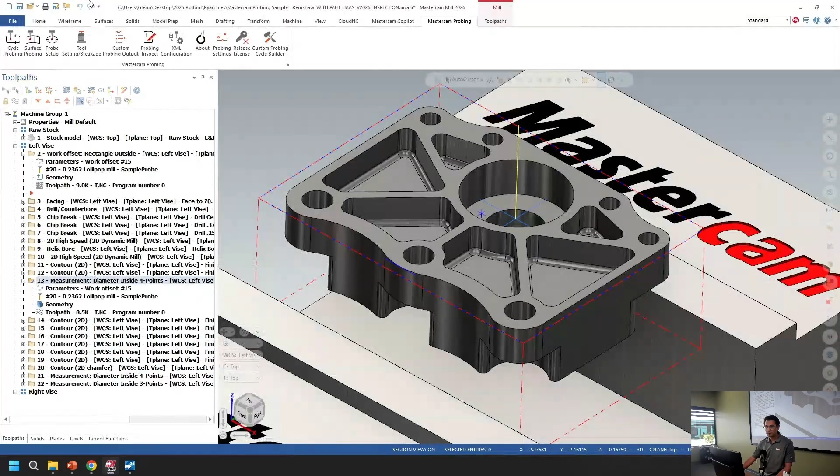I am going to show a demo as well.

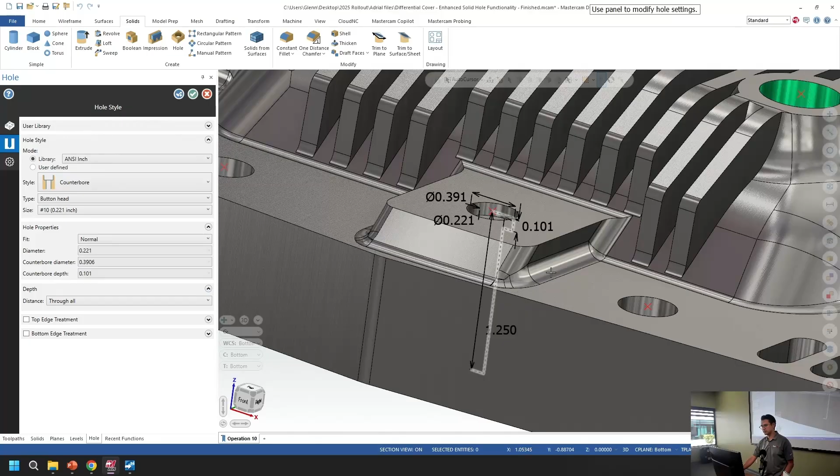But we do have an option to edit that if you want to base off of it, and I'll show you that in a second. Looking at the hole depth, we've updated this as well, adding the through all function. Just by switching that, we were able to switch to through all. Let's go back to blind hole. We also added depth for the shoulder, so we can add the depth to the shoulder as well as to the tip. Enabling those will change that, and you'll see your profile outline updating.

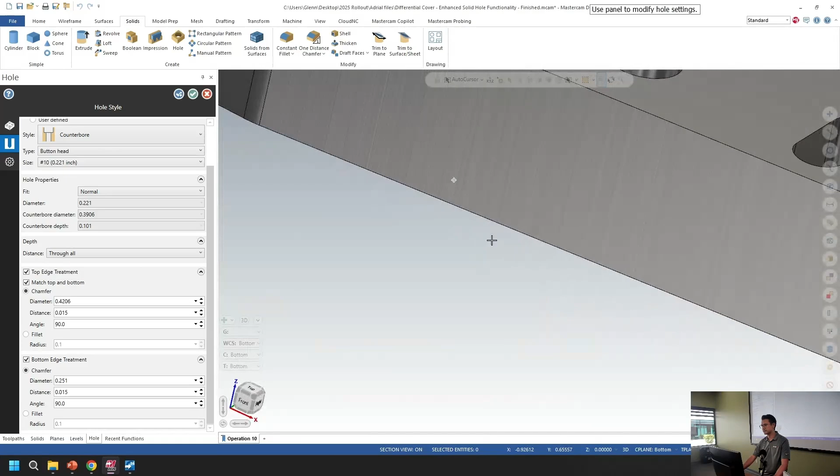Now let's jump back to through all. We also have edge treatment, so clicking that will enable it. Let's zoom in here, and we can apply edge treatments to your hole. You can also match top and bottom by clicking that, which automatically enables your bottom edge treatment. It's hidden somewhere there, but it's okay, it adds that.

So like I said earlier, we can make edits off of this industry standard. We do have a toggle here, seen earlier, for user defined. By clicking that, a couple things happen: your type is removed as well as your size, because you're going to actually edit the dimensions of the hole property. So you could come in and click, edit, and change. This is all editable.

Let's say you have a starting point, or you want to use this starting point of this counterbore hole, and want to make slight adjustments for whatever reason for the particular job. You could do that now. And let's say you like that hole and want to save it for future use. So we have our hole libraries up here.

If you had a hole library already created, you could click this dropdown to view it. But let's go and create one now. We're just going to call it 'saved' for this time being. Let's create that library by clicking this button here, which allows you to create new libraries. Then adding that is simple, just clicking this other button down below in our presets. You could rename this, select new libraries as well, then clicking that will save it.

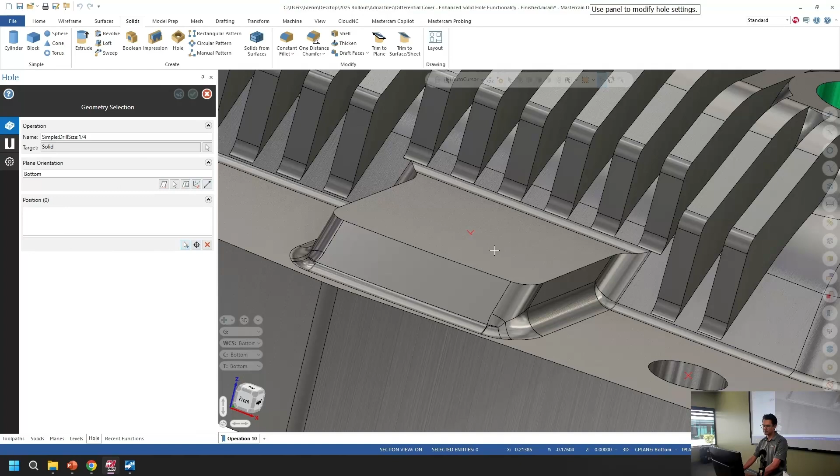And again, because it's a live demo, let me just select that one more time. Oops. So it always happens, right, with the live demo. There we go, let's just use auto cursor, so we can just place the hole wherever we want.

Having this list shown here, you could build as many libraries as you want, as many hole styles as you want. Also, if you already had your hole styles or libraries from your previous Mastercam, you can import those into the new version and show them there. Or if someone has given you a predefined hole library, you can pull that in as well. These could be selected and updated and changed whenever you want.

Once that is added and your library is created, you'll see we have a separate section down here called User Library, where you can click the dropdown to view and toggle between and see the holes you've created.

We've also added a threaded hole, so threaded holes can now be used. This is new for 2026. You do have a lot of types you can select from, as well as sizes, to build out those holes.

So that is the hole style tab, and let's jump to the advanced tab. The advanced tab has a lot of the same options as before. We do have the ability to show threaded versus non-threaded holes by clicking that and changing your color, and same with the hole position associativity.

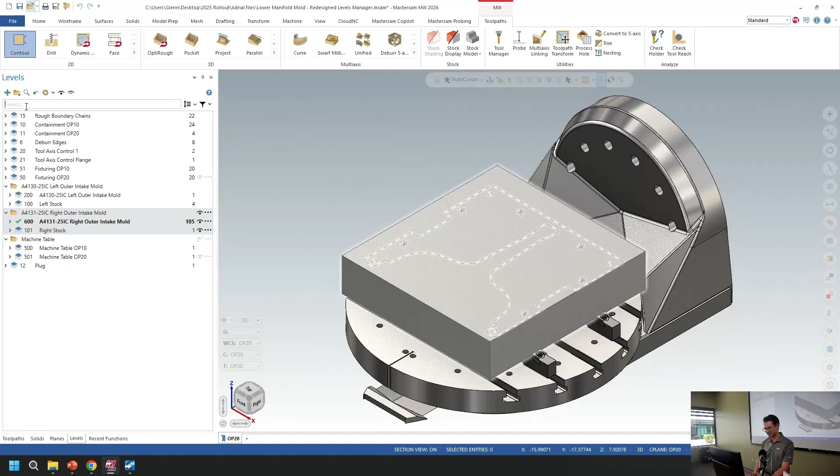Now with the new introduction, we also added the ability to search. So searching—this is a very small level list, but I know parts out there with just thousands of levels. Here we can search for levels. Let's say, for example, I want to search for this fixturing option. I can multi-select, and you can also see that the levels list has filtered out and shown just what you typed in there.

Right-clicking, I could quickly group those levels, and then a slow double click at the group level, I could rename it if I wanted to. Also clearing that will clear the levels, and let me hide that because I want to show you that in a second.

We also have sorting—we had sorting in the past, brought it back of course. You can sort by level number, level name, entity count, level visibility, ascending or descending, and you could reset that sort when needed. We also now add group filtering, so you could view just any ungrouped levels and that will filter that out. If you want to see one group, you can click one group and that will show it. Resetting your view is quick and easy.

One of the biggest things I'm excited to show here is entities. So what I did here is I expanded the level, and within the level we now see all the entities that make it up. This level has 105 entities, and within that we have our arcs, lines, points, solids, splines, surfaces, all shown within this. You can see as I'm clicking through in the graphics area, those are being highlighted.

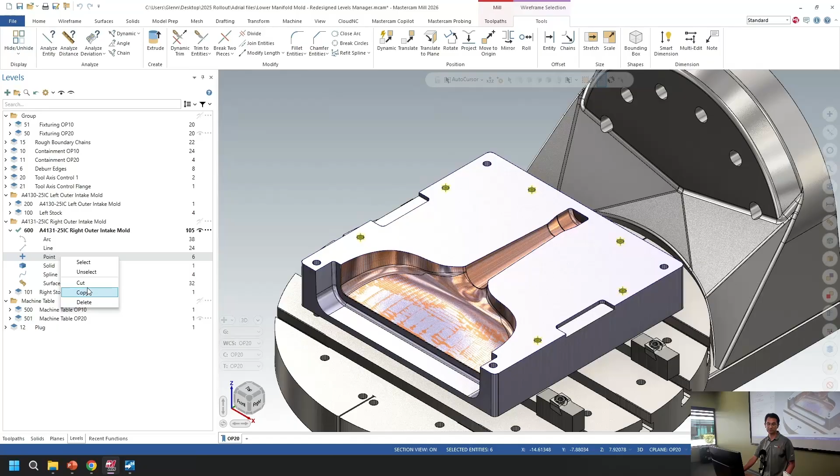Now let's say you're creating a level and you accidentally put these points on the wrong level—many of us have probably done that, using the wrong active level, switching, and you're like, oh, I wanted to put it in this plug. Well now you can right-click, either copy those or cut those out, and I'm going to paste that there.

Let me expand that, and now our points are there, and they're not here anymore. We do see that when you take action on a level that has visibility off, it will turn the visibility on because you are acting upon that. But now we have those points shown on this level.

And if you want to delete those, you can delete those. You can also copy them too. So if you want to put those on multiple levels, you have the option to do that there.

We also have contrast rows shown up here. And with the new level visibility, we have our toggles. The all levels on, all levels off are still up here, we're just using the eyeballs to show that. So again, toggle all of them on. Clicking that again will reset the level visibility and bring it back.

One other thing you can do is create groups up here. So you could create groups, and you can see here as I create groups, you could just nest to your heart's content. Again, that just allows for easy user organization of your levels.

So that's the levels manager. Any questions? Can you still export, import? Yes, you can still export, import.

Saw some other hands? Is there any enhancements being done, like a lot of projects I work on have 200-300 plus operations, to go select an operation and go directly to the level and geometry that's associated with that operation? So the question was being able to select an operation and go to that level of geometry. That will probably be another team working on that, but we could talk to that team and see if that's something they're looking into.

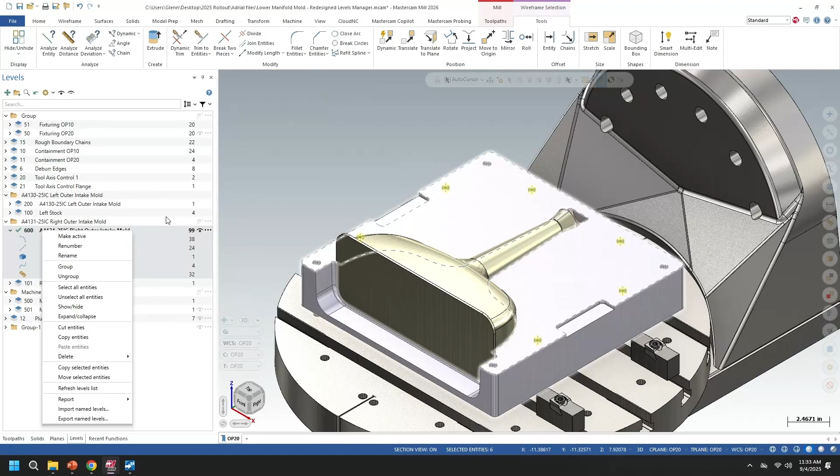Two thoughts. One is renaming a level. Is it the right click or did you use the triple click on it? Yeah, so renaming, it's a slow double click. How many clicks? Two. I found it was three. Okay, as a thought.

Next thought is, I want to make a new level. I don't want, when you go to make a new level, you hit the plus, it automatically puts it sequentially to the next level. Well, I want 500. Got it. Yeah, so if we want to do 500, we'll double click the level number, then you add the level, rename it.

Yep, but because we already had a level, in 25 and earlier, you had an option to go in there and put what you want. So if you go into the graphics area and you right click, you have your levels right there, see the level box right there?

So now if you type in the level box, type in 500, colon, test, and enter, you'll see it show up on the left-hand side. It should have popped in there. If you put the double... oh, we already had that, let's do a new number.

Yeah, let's do, let's say 600? Yeah, 600, then you do the colon, this is a separator. Oh, I already have, what your comment is, it automatically creates it, makes it active, and sets it for you. Yeah, there it is.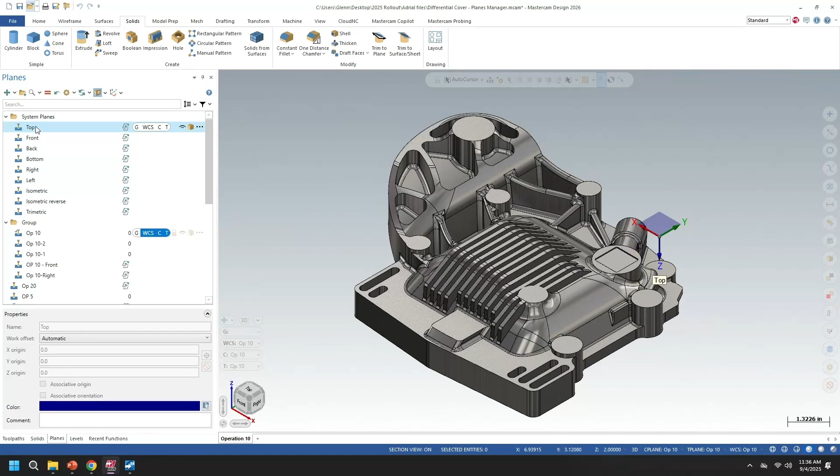So with the Planes Manager, again we brought the same treatment of grouping, level grouping here. First thing I want to show is that all of your default planes, top, front, back, bottom, etc., are all in the system groups. The system group planes are always going to be at the top of your list, they will always show up there. You cannot drag them in and out of the group. So you can see I'm clicking and holding to drag it out, and you can't bring it in and out. Those are your default planes.

However, all of your other planes that you've created, what we call your named planes, can be moved in and out of the groups. So for example, I want to move this out, I could quickly bring that up and move it in there. And you can see I cannot bring this into my system planes, I can only move them into my created groups.

Looking at this icon here, we are now showing the type of plane you're using. So if you created a mill turn or a lathe X, lathe D, that will show here. We don't have that in here, but if you came in here and created a lathe plane, it will show a lathe icon now, and it'll show either the lathe D, lathe X, and so on. We do have the check mark showing that it is a used plane.

And then we have your plane name, your work offset number. Now this icon here is signifying that it's an automatic work offset, so that's being set there. Whenever you set a manual work offset, it will show the number here. We have our coordinate controls, our lock, unlock, display gnomon, section view, as well as options here as well.

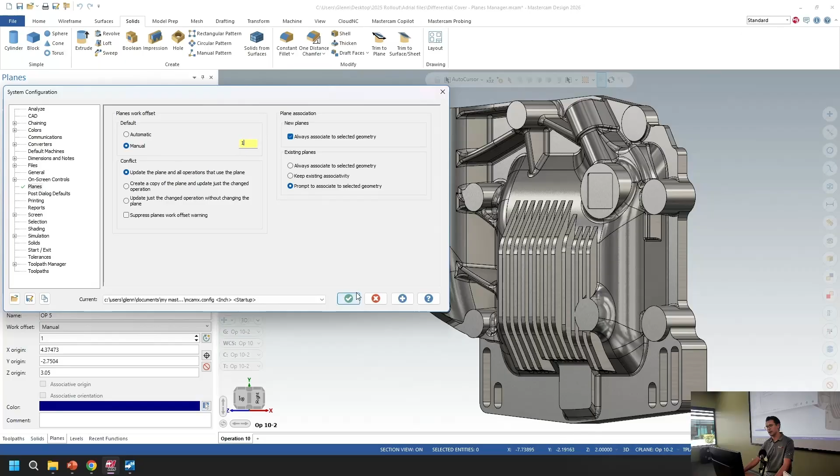In config, you can set your default work offset. If you know you work with a certain number, you can set that here. I won't click it now since config may take a while to load, but it will set this default work offset to 1. So whenever you're creating a new plane, it's always going to be set to manual and set to that number.

Showing up here is how to edit those and toggle those displays. If you click that, you can toggle it, you can see our lock is now gone, and we could bring it back. So again, you could customize how you want to see things. You could access those options through the right-click menu, as well as the menu option here.

In the properties display, you can hide options that you don't want to see. Now, all those options, if you hide them, you can still get those by clicking edit, being able to jump through here and creating those options there.

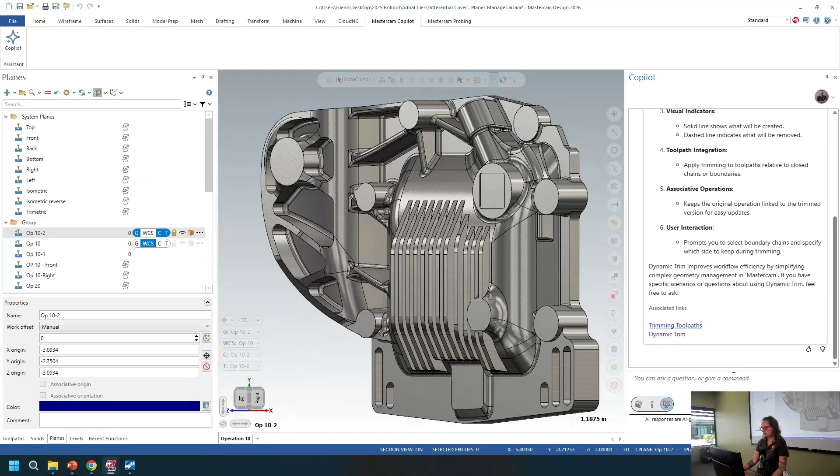Let's see now, maybe I want to open a file. So I typed in open file. It is going to open the file manager for me so that I can quickly go and find the part that I want. All right, I want that part. So, typed in open file, opened it immediately for me.

Pretty cool. Now I'm going to move to automatic. Now it's going to start figuring out, do I want information, do I want a command? So that's a little far away, let's do screen fit. So it's going to pull it up for me. Next up, maybe that's too much, I'm going to say zoom 80, and it's going to push it back for me. So just using this chat command, you can start to interact with Mastercam.

All right, so from here, let's see, maybe I want to open up dynamic contour. So it's thinking, and based on what I gave it, it knows that I want to open up a dynamic contour toolpath. It didn't give me the information about it. If I wanted the information, I should have said something like, tell me about it, or I want to know about this. But let's just do that really quick. Have that selected.

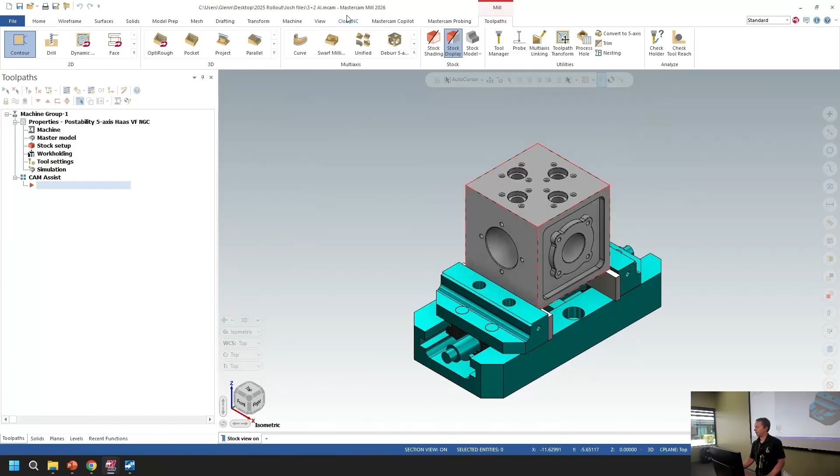CAM Assist is an add-on in Mastercam, so it's its own separate company, its own separate entity. But when you purchase CAM Assist and install it in Mastercam, you'll have a tab here in the ribbon, and then you'll have those three features that I mentioned in the PowerPoint here.

So I'm going to go through, and bear with me, some of you have seen this, I'll try and go over it pretty quickly. But you want to set up everything in Mastercam correctly. So if you have a fixture, you want to set that up in your job setup. Your model, your master model, and your stock, all that it needs to know so it can generate the toolpath as best as possible. I've already selected all that for time's sake.

I'm going to come into the CAM Assist icon here and click on that, and then you have a drop down here. We're going to focus right now on just going over the CAM Assist parameters. When you click on that, the first time you do it, it's going to ask for a license, and that license is done through your My Mastercam account and your email. So it's tied together with that. If you have more questions on that, feel free to discuss that with me.

So we have 3 tabs here, a general tab, a tool use tab, and an advanced tab. CAM Assist comes with its own tool library. I'm going to leave most of these defaults on so you can just take a look and see what it does, but I'll discuss them briefly. They have their own tool library with hundreds of tools, and they're assemblies, so they've got their own speeds and feeds recommended.

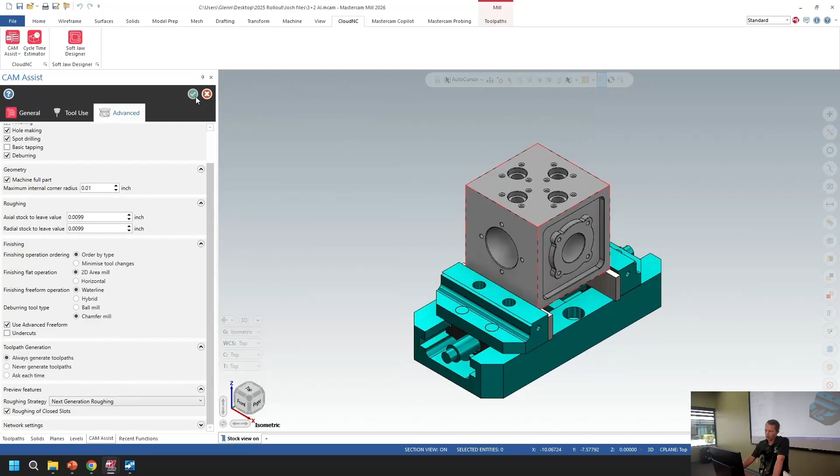And then they have this next-gen roughing strategy. Again, this is another enhancement they came out with a few months ago, and it's a lot better than their previous roughing strategy. So I'm going to green check out of here because everything should be set, right?

And right now it's taking the data and sending it off to CAM Assist, like an AI model if you would, and analyzing the entire part. So it's analyzing it and saying, how do we best approach this? And as you're all very well aware, there's an infinite amount of options when you're programming, scenarios you run into, complex things. So it has a lot to go over there and consider.

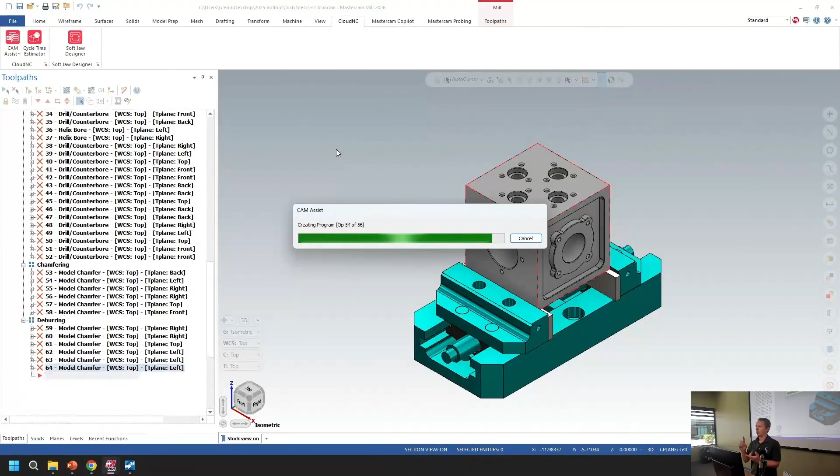So we'll see how fast this computer is. But you can see here on the left, it's populating the toolpaths, stock models, and toolpath groups. So it's really cool in that if you told me, go sit down and program this right now, it's going to take me a lot of clicking, a lot of time, a lot of making toolpath groups, stock models, right? It lays it out real clean.

So right now, I've saved a lot of time. And then it gives us a summary right here of how many surfaces and how many finishing operations and different things. So I'm going to hit OK. And then it's going to ask, do you want to see the cycle time estimate? I'm going to say no for now, for time's sake.

And now it's regenerating the toolpaths in Mastercam. Okay, so now it's completely done with the cloud side of things. It's completely regenerating in Mastercam, and I can edit any toolpath in there. So this, like the speed of this, is based off your system now, right? How fast can it regenerate in Mastercam?

So you can see it's already regenerated a bunch of those toolpaths there. And again, I don't know how fast you are with programming or clicking, but I can't get anywhere close to this fast with creating toolpath groups and all those toolpaths. So think of CAM Assist as an assistant, as a technician, that's going to help you program and do a lot of, we call it around CAD-CAM, the heavy lifting, the geometry selection, everything that I've already gone over.

And sometimes we've had customers approach us with, hey, we want this to do multi-axis work. But think about it this way: it frees you up to do the complex stuff that our minds can navigate around and comprehend. So think of it like that technician, that assistant who's helping you get the easy stuff done and laying everything out really nicely and doing it really quickly, selecting all that geometry, the avoidance, whatever you need.

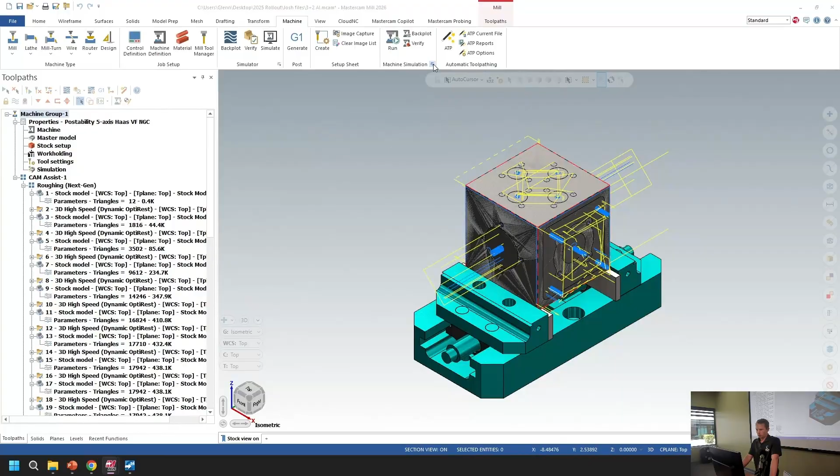I'm going to show this in machine simulation if I can here. We'll find out if it works. If I go to machine here, click on the machine simulation icon, and let's go ahead and select elements. We'll grab our part model there, and we'll use our Mastercam fixture and our Mastercam stock, and I will use the external post, and hopefully we have everything selected, simulate.

So hopefully we will be able to see this in machine simulation. And remember we selected 3+2, so we'll be on a trunnion here. Take a look. So right click, we're going to fit. I need the co-pilot for that, the fit there. And we'll turn off the housing here. And let's check our speed and run this a little bit so you can see.

It's going to come in here and do the first operation, and I'll kind of run through it. But how easy was that, right?

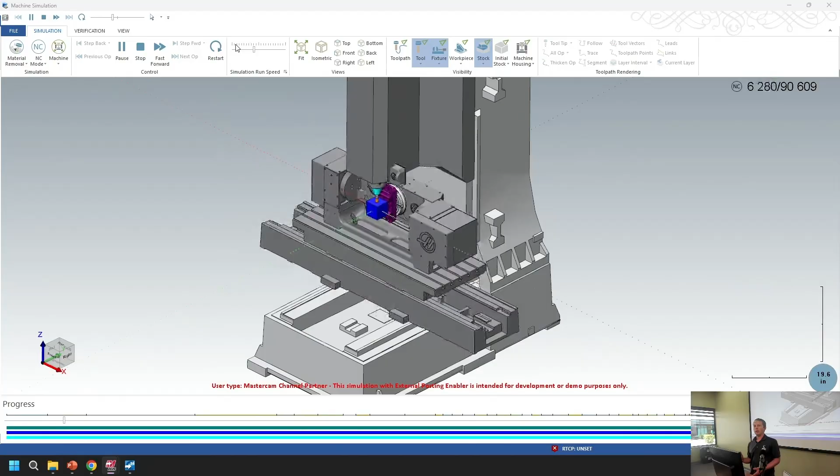Yeah, so again, keep in mind there's some parts that surfacing it's still getting better at, some things it's still improving on. But if you want to race me programming this part, go for it, I'll bet you lunch over it.

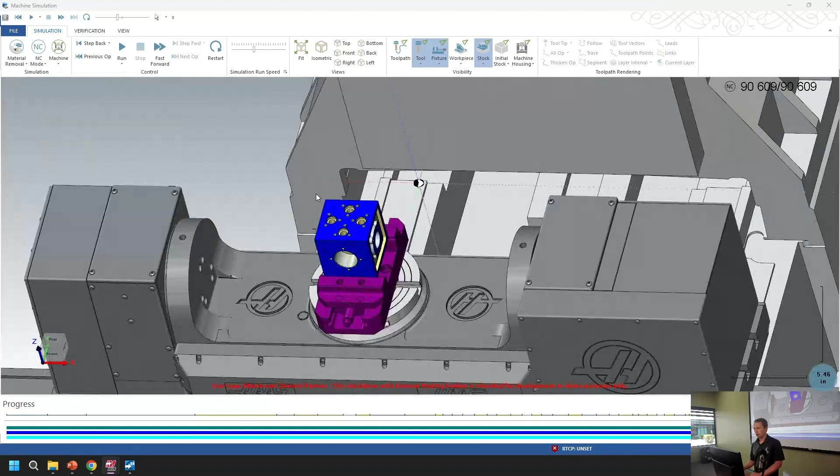So anyways, I'll fast forward this here to the end. But I'll show you the part, and you saw it. I mean, I had no toolpaths or anything, right? And look at this cube with the holes and everything. So yeah, it's pretty cool. Very, very powerful, right? Again, all the selection, all the geometry, everything, solid models, everything. So it's really, really cool in that.

I'm going to show one other thing here. So let me see if I have... In CAM Assist, they also have like a soft jaw designer here, and I'm going to try and show this. See if I get my part. This one here. So this is also another feature, and they also have a cycle time estimator.

That's cool. You can just kind of take parts, and I believe it's up to 10 parts, and you can run the solid models through it, and it kind of gives you an estimate on your time for quoting or different things, right? So it may not be perfect, but it's a really, really neat feature, and really something you could take advantage of.

The soft jaw designer here, I'm just going to show this. It has the icon here, and we'll open this up. So I'm going to select my part here, and you can see, actually, I'm going to close this really quick. You can see I just have two pieces of aluminum, or whatever, steel, something.

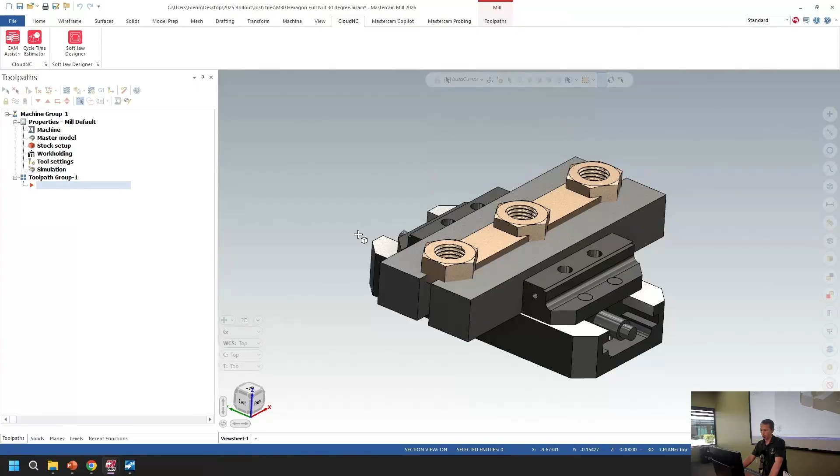They're not machined, right? So if I go back into the soft jaw designer here, I can select my part right here. I can select, it says the two jaws, so I need to have this jaw and this jaw, right? And then I need a spindle direction, so the spindle is obviously going to be coming vertically here.

And I need a jaw opening direction, so basically which way are the jaws opening and closing. And then I got a bunch of other parameters down here, but most of these are populated because of the information I've already given it. So if I come down, you have this checkbox, the multi-level. If you want it to be a flat Z depth, you can just have it be a flat Z depth. In this case, you'll see hopefully here, it's actually a multi-level Z depth, so we'll see that in a minute, but I'll leave that checked. Multi-level Z depth, and okay, so then we'll come down to...

Corner reliefs, right? So in this case it's defaulting to an 1/8 inch. Maybe I'll go like .1875. I always forget that when I'm in the field, it changes it. And then let's green check, we'll see if I forgot anything. We'll give that a minute to generate, see if it can do it. When you're doing it live, maybe you never know if you forget something. Find out. But so now it's complete, right?

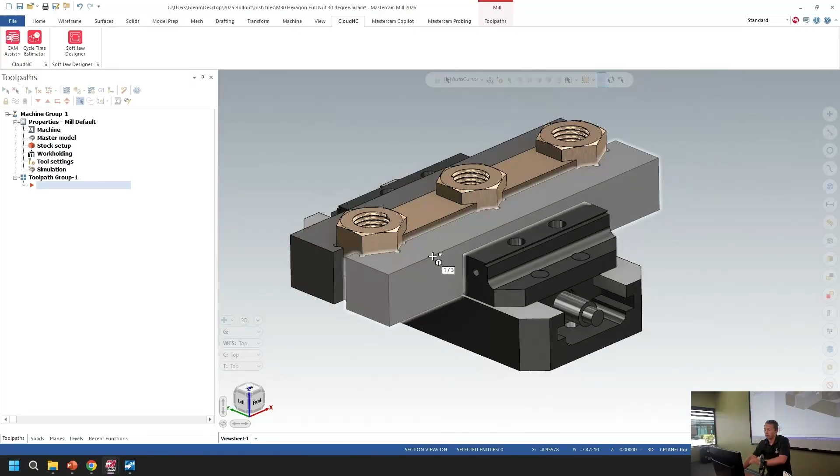So I'm going to click on the jaw here, hit Alt-E to hide everything, and you can see there's our multi-levels in Z, we have multiple Z depths. So I think that's cool, right? How many times do you have to sit there and draw stuff or curves on edges and then offset it because you need, and then you got to enlarge the relief drill size or whatever, for the edges. So anyway, just some really neat things that they're coming out with.